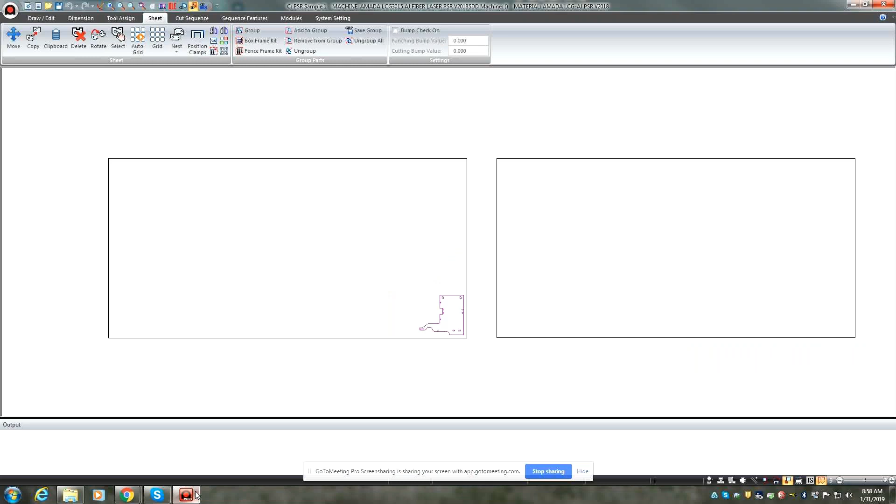Can you see my screen? Yeah, we can. We're on a projector so it's a little bit delayed, but we can watch my laptop screen also. Okay, well basically Zach wanted me to go over all the PSR stuff.

You guys currently aren't using AP100, is that correct? That's correct, we're Sigma Nest right now. Okay, so I guess because Zach said just make sure I show you guys the PSR stuff, which is what I'm going to show you. Anything else, all the other stuff, Mike Albert would take care of demoing for you.

Okay, so anyway, basically what I did is I took some of your parts and just put them on the sheet, nested them. Some of them common cut, some of them not.

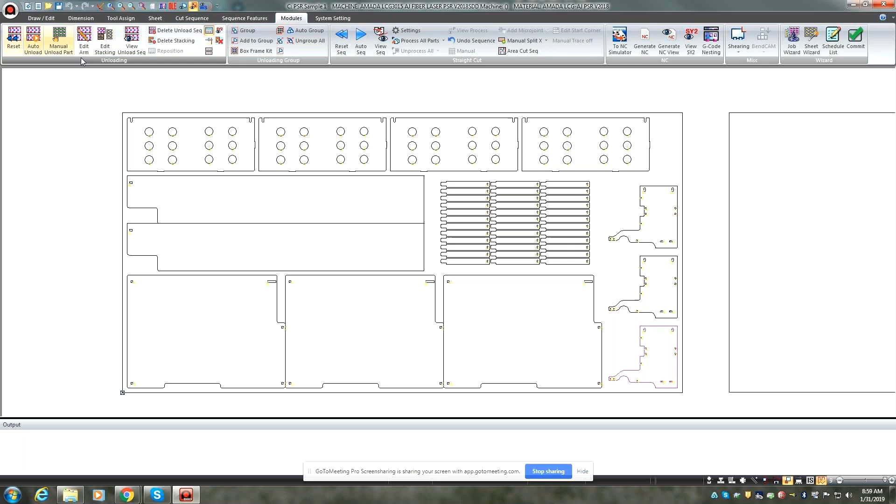Before I get started with the process, I'm just going to go over a few of the PSR stuff, which is located in our modules here. This menu here is all of our unloading PSR menu. Basically we have settings that are preset for you. This is all your cup location and whatnot, and pretty much you won't have to deal with this at all. It'll be all preset for you.

The only one that I would think you might want to check would be, for instance, we have a stacking module. If you want to just go ahead and drag parts from the sheet over to the drop table manually, you can turn this off and not use our editor. Editor is really nice though, and I'll show you that as well. So that would be a checkbox here.

Everything else, I mean, you definitely want to be able to rotate your arms, so you'd want the rotate, show arm dead zone, whatnot. And auto detect is automatically going to turn the cups on for you when it sees it inside of a good spot on the part. If it's inside of a hole, it'll automatically turn it off for you.

But basically the layout here, this switch here, this might be something you'd want to check. Right now it's set to sheet, and basically what that's going to do is take this entire sheet layout and drop it to the table the exact same way, same positions. Okay, so everything the way you see it on the sheet is the way you'll see it on the drop table after it's been unloaded.

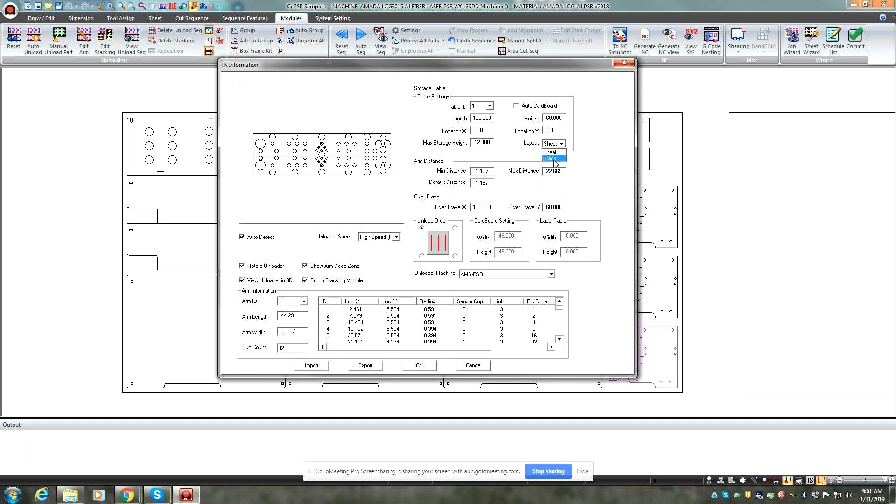We have a stack option here, and I'll show you the difference between the two. Basically that'll take all the like parts and stack them on top of each other. Okay.

So before we do anything here, there's a few parts here that I'm going to common cut. The thing is, with the PSR, you've got to remember the table's going to shuttle over to the pickup area where the robot's going to pick up the parts. So during that movement, there's going to be vibration, and corners could slide under the skeleton. So those are things we want to be aware of before we unload parts, and we have a lot of tools that will allow you to make sure that corners and stuff are freed up so that the PSR can pick up without any problems.

Thicker material, you don't have to be as concerned with it because obviously it's a lot more sturdy, and the moving around is going to be a lot less. It's just the vibration of the table moving that I'm talking about.

So what I'm going to do is, we have a feature here, and what we've tried to do in the PSRs is put all the features you're going to use here all in this one ribbon. So we have this straight common line cutting. So what I'm going to do is common line cut these two parts and these two parts, but I'm also going to use the same feature for these parts here. And the reason is because we have these little notches here that we have to deal with.

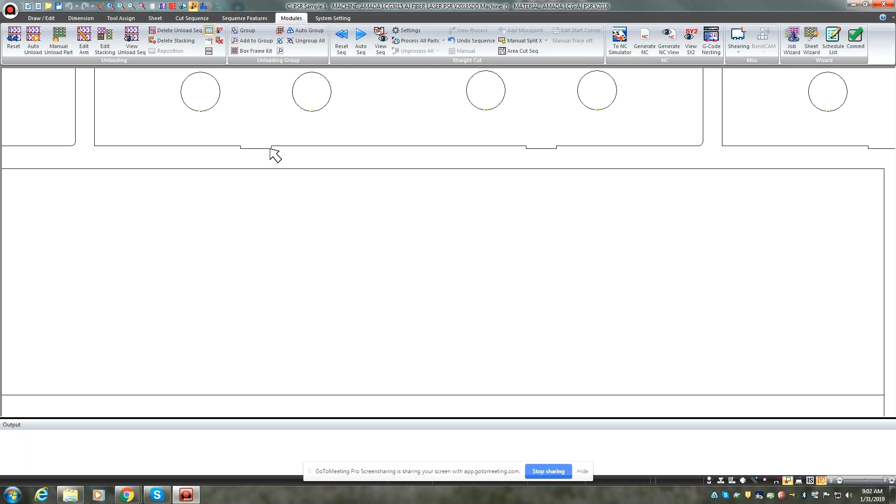This is very easily dealt with. I noticed that I think these were the 10 gauge parts, you gave 10 gauge and 12 gauge. I think these were the 10 gauge. So this is pretty thick, but still this is a very small notch and can easily cause you a little bit of problems with pickup. So I'm going to show you how we can free this whole area up and make it a little easier for the PSR to pick it up.

So what I'm going to do is come here to my settings first and just show you a few things.

We definitely want to use the straight edge cut. This is what you're going to use for the common line cutting for these particular layouts here. One thing I'm going to do here is check—there's a lot of features in here, and Mike Albert can go over these in detail with you if you need. But I'll show you what I'm using right now, which is this area here, the notch split.

Looking at this sheet on your actual crate table or bed that's being cut, your slats are going to be vertical here. So we can actually drop material in between those slats, and those slats are around maybe 1.5 inches apart—let's just say they are. You'd actually have to go down and measure to be exact.

So what I'm going to do is check my X box here, and I'm going to put in less than an inch and a half because I want stuff to drop in between. So I'm going to put in, say, 1.25 inches—that would be a good value to use.

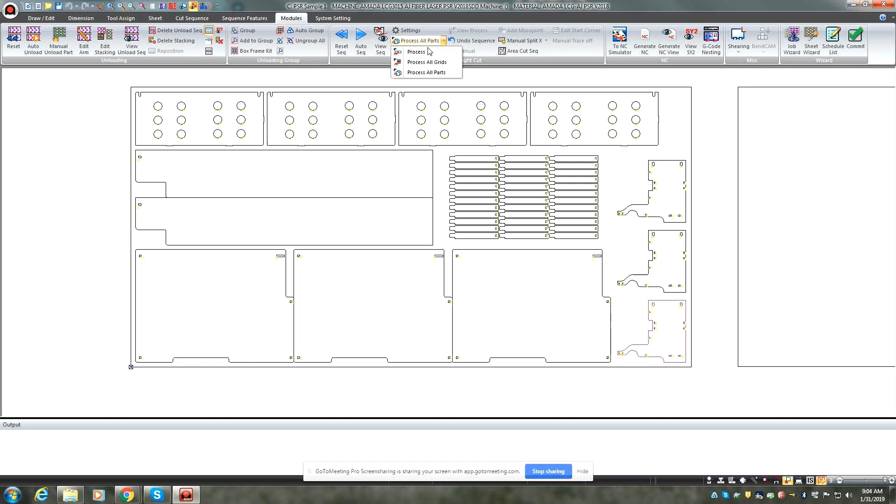Now with that, I'm going to go ahead and set these up to common line cut. The way to do that is—I don't want to process everything because I'm not common line cutting these, or these either. So I'm just going to come here to go to process. All you do is click the parts that you want to common line cut. So this one, and this one.

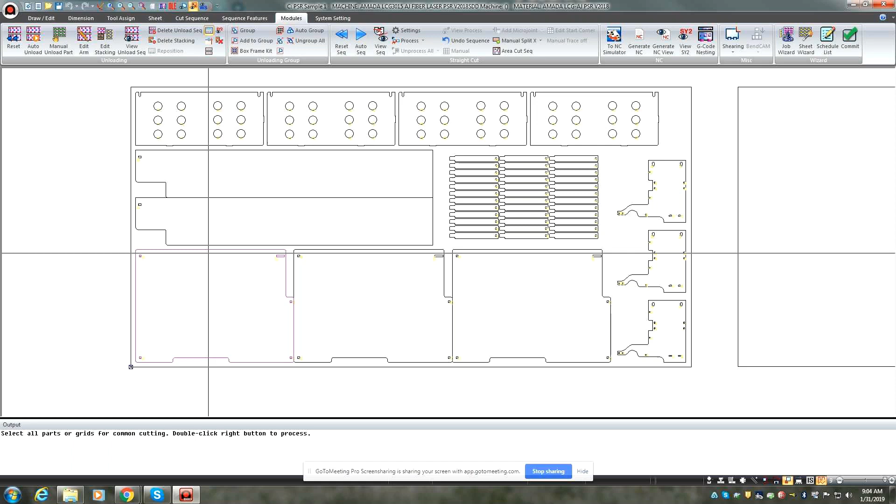Notice the message down here—well, I aborted—but the message at the bottom says double click the right button to process. So if I double click the right button, that's because I aborted. Let me do it again.

What it does is process the common line cut. Now notice what it does if I view the process—basically it shows you what it does. This is the common line cutting. The blue line is the common line cutting. The actual black line that you still see, that's going to also be cut as well.

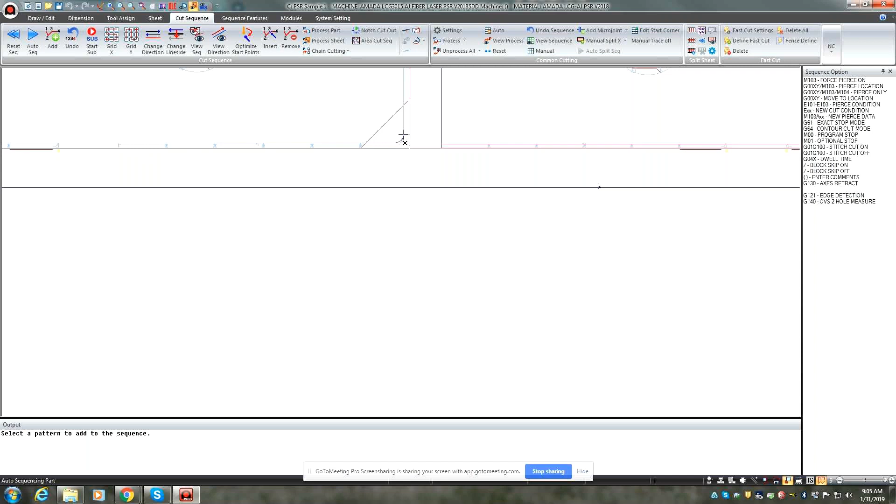But you'll notice when we cut, we're going to have that 1 1/4 inch or 1.25 inch split. So if you notice when I go to sequence all of these parts, notice all these little sequence lines you have here—this is going to drop these little slugs down. So what's going to appear when this is taken over to the PSR is none of this material is going to be there—it'll be pretty much just a straight rectangle.

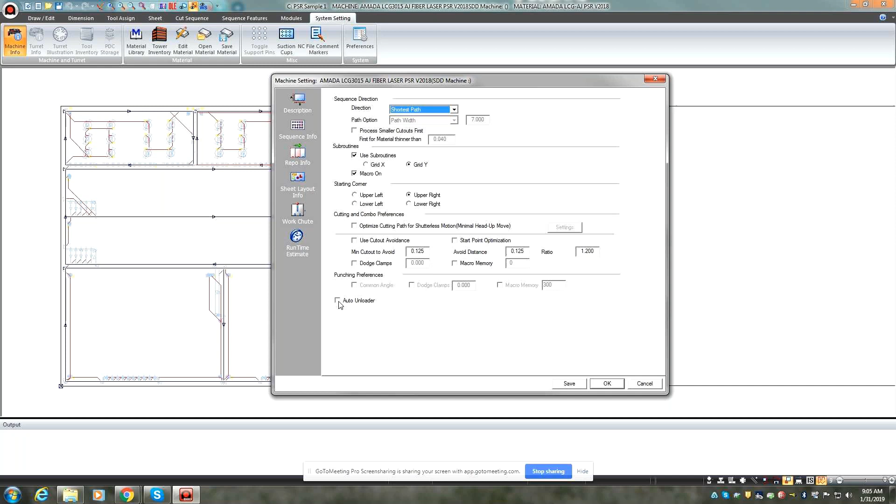PSR should be able to come in and pick these parts up. So when using the PSR, we can set up our machine info over here. We have an option in the sequence info to let it do this automatically for us. This isn't a bad idea—let it go ahead and do its thing. It's easier to edit and change what it's already done.

I should say it's not easier—it's just the same, just less time to let it do it. Then you can go back in and see, hey, maybe I'll do it this way. That's what we're going to do. So if I come over here to cut sequence, I'm going to reset it. This time I'll auto sequence with the auto unload on.

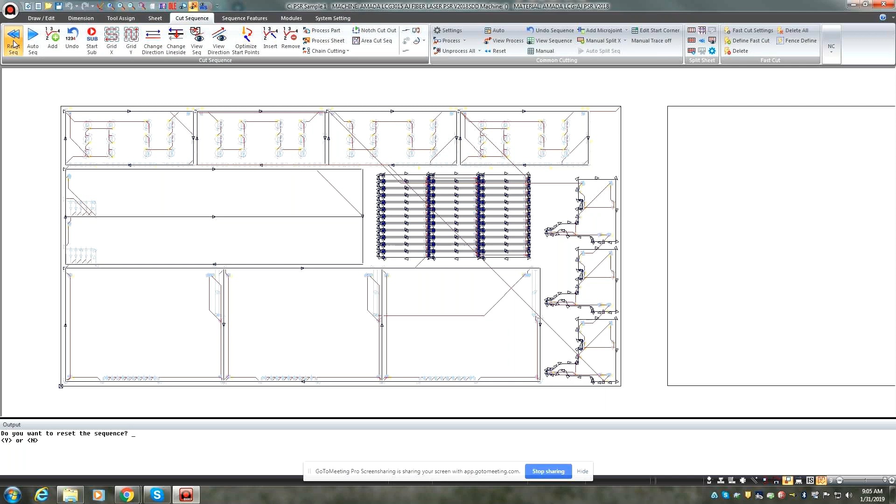What it's going to do is unload everything. Notice I had my settings set to sheet, so basically what you see here is what you're going to see on the drop table. It's also fast—maybe not as fast on yours, maybe you'll see it a little better. But we have this option down here that you can slow it down. That'd probably be way too slow.

I think that's going to be way too slow to watch the cutting—I don't want to take that much time. Let's speed it up a little bit. That's at 8... yeah, see, 9. I'll speed it up. There we go, that kind of slows it down.

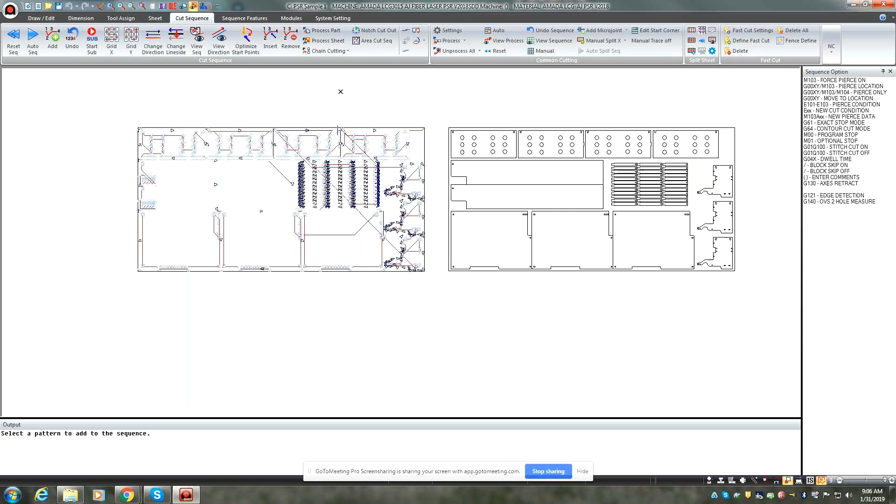But anyway, you can see as it's going, it does all the parts that way and does it the same as a sheet. So if we come over to the modules and go back over here, we'll set it up to stack and say okay. Now if I reset the sequence and say auto.

Oops, sorry, my bad. I need to reset the stack, so let's just delete the stack.

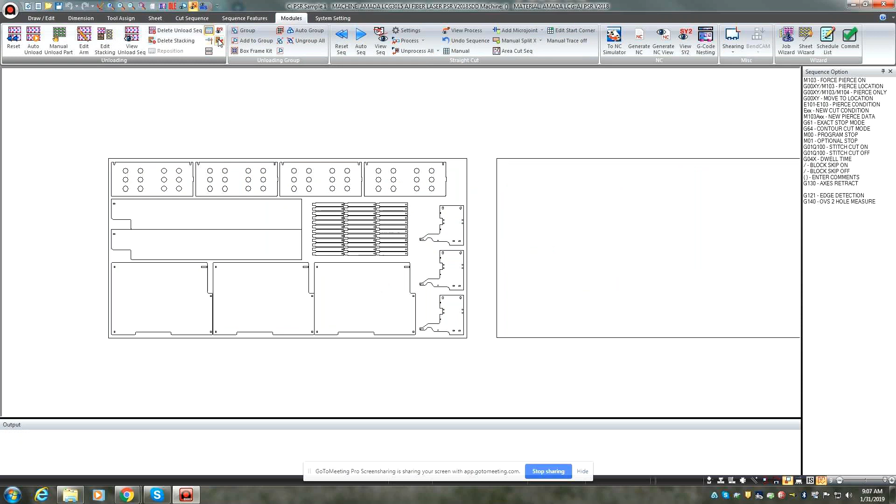Now if we go auto, it'll stack them. The thing is with the stack though, is it stacks them according to wherever the first part is, so it's kind of still like the sheet. This is not good, especially if you have a pallet here and you're trying to stack them all on the pallet. This part over here is obviously not going to hit the pallet.

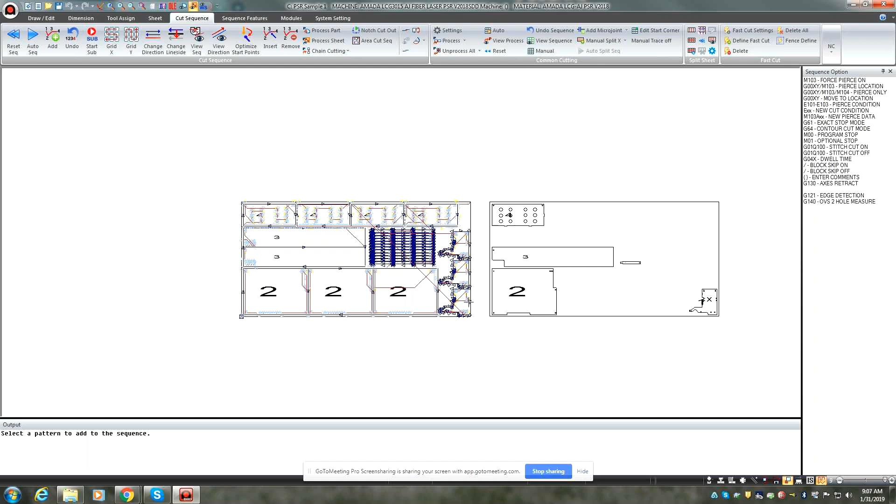So what we could do, and this is what I was talking about, is turn that switch on and off from our editor. I'm going to turn off the editor right now, go to edit stack module, uncheck that, and say okay. That allows me, when I go to edit stacking, to come over and say I want these parts over here, and maybe this part over here. So it allows you to manually manipulate how you want that stack table to look with the parts.

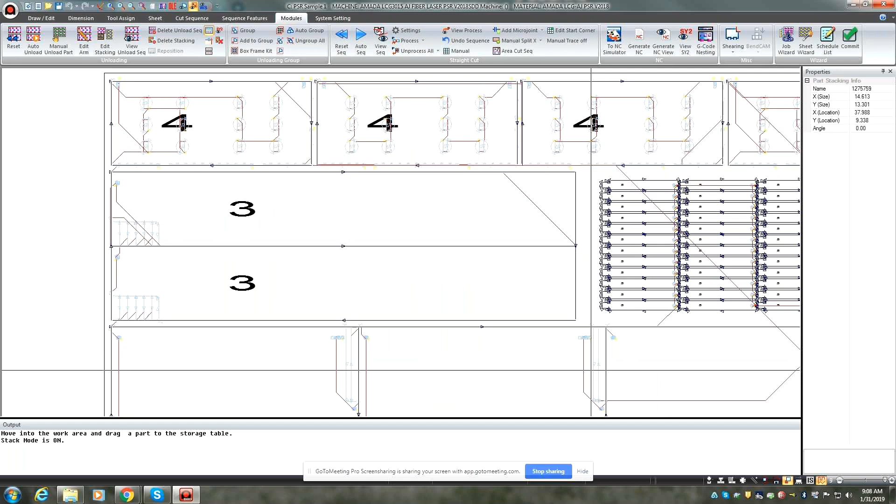Okay, so basically I don't know what happened because it went so fast and I didn't really see. All I know is that my cutting's good. I've got all the slugs that I want taken out, this is all taken out. So basically my parts should be good, now these are the ones I'm concerned about because they're really small.

And I'm going to show you a feature, and I purposely did this to show you a feature. We have what we call a box frame kit. What I could do is tab these into the actual material, box them in, and cut out the box and pick up all of those parts at one time. I'll show you how we do that.

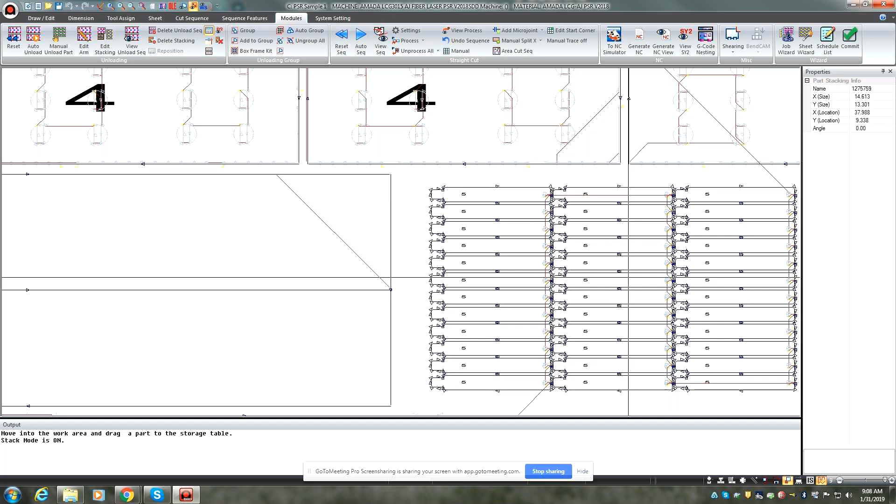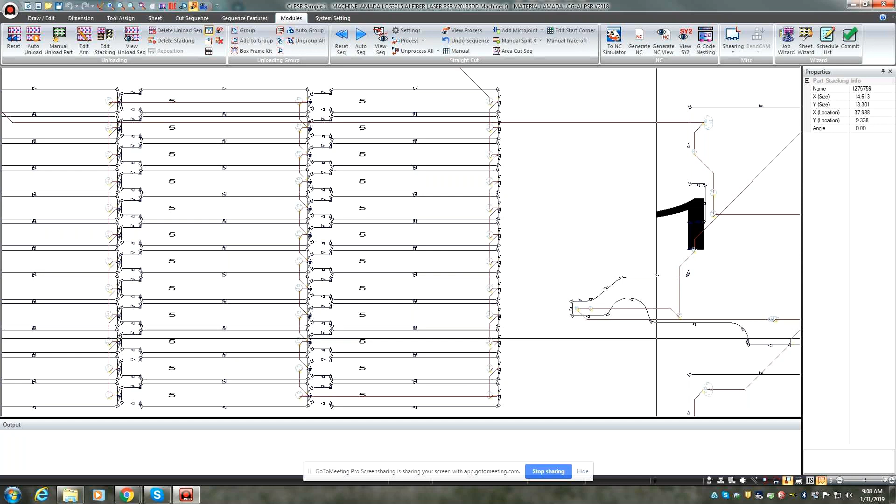This part here has got a lot of cutouts. I purposely wanted to show you this because, thick or thin, it may cause you problems. Thicker, not as much, but thin, you probably would have a hard time. It probably would hang up on the frame or the skeleton, and it might cause you problems. So I'm going to show you the features we have to kind of clear this up and free it up a little bit, make it easier for the PSR to pick that up.

So first, let's check this top part and see what the software did with it. We come over here - I'm going to go back because I'm going to show you the stack module next, let's turn that back on. But let's come over here and edit our arm and see what it did on this particular part. This particular part looks pretty good.

The suction cups that you have here that look like a bullseye, those are sensor cups. One of those cups has to be on the part in order for it to pick up the parts. If it doesn't sense material underneath, it's not going to turn on suction for any of them. So what it will do with that auto detect I had, notice these cups turning on and off if they go over a hole, and then if I come off the hole, it goes back on.

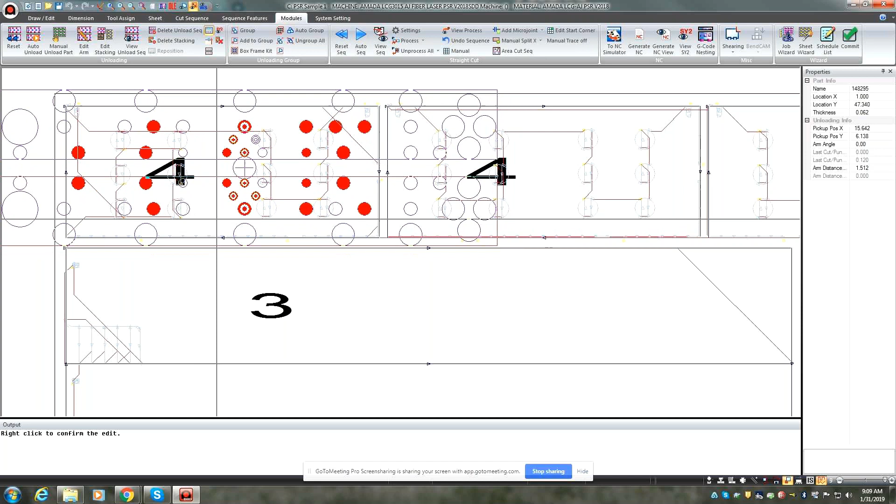You can position this however you feel it's going to be strong enough to pick up the part. And I will say the suction on these cups is pretty strong. In fact, just yesterday I was out there, we have a machine here, and I put my hand underneath the cup - one of the techs was showing me, and it sucked my hand right up.

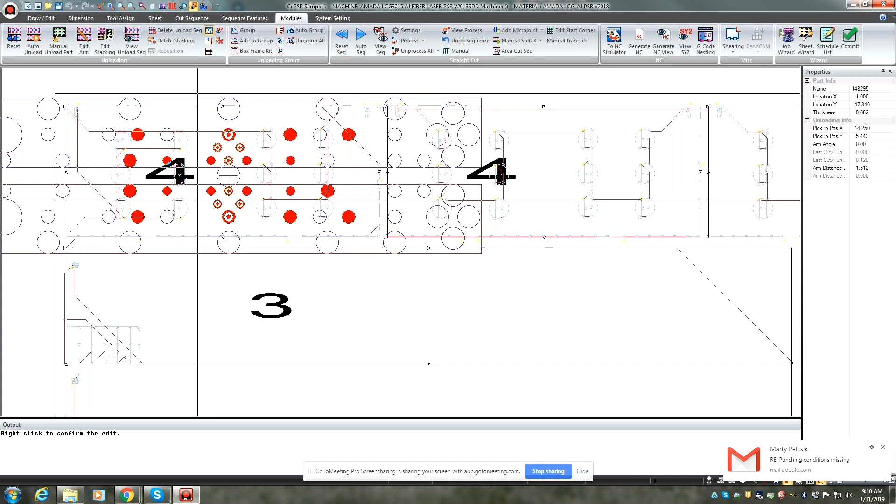They're pretty strong. So the way to position those, as you can see, I'm just holding my left button down, you just put it wherever you want to put the bottom arm. And then what you can always do is stretch the top arm. So there's a minimum - let me zoom out a little bit - there's a minimum and a maximum, and once you hit it, the arms will stop.

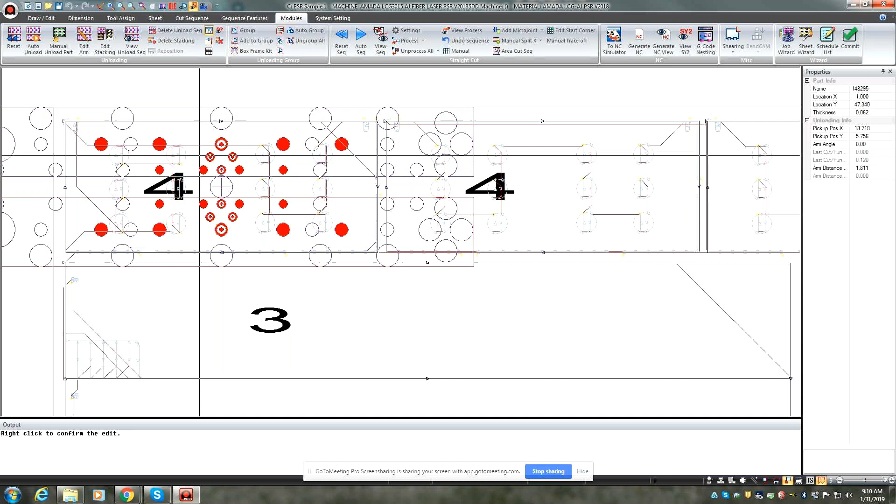So obviously you can't go any further than that's as high as I can go with that. So you can do pretty big parts, and I'm going to show you on this one down here. But anyways, once you get the arms where you want, you would just right-click the mouse, and that locks that in. Now, because all these parts are the same, it's going to be the same on all the parts. Okay, so this part's good, arms are good. I'm going to go into the editor to show you the stacking, so we'll ignore where that is for now.

So let's go to the next one here. Now, this particular one - okay, that's picking, and that's good. That's a good pickup. But I feel that these arms are strong enough for me to pick this part up, and then this arm to pick this part up without any problems.

Every single cup will be turned on. If I center it properly, I don't think I'll have any problems picking up one arm with one part. So I could pick up both those parts at the same time.

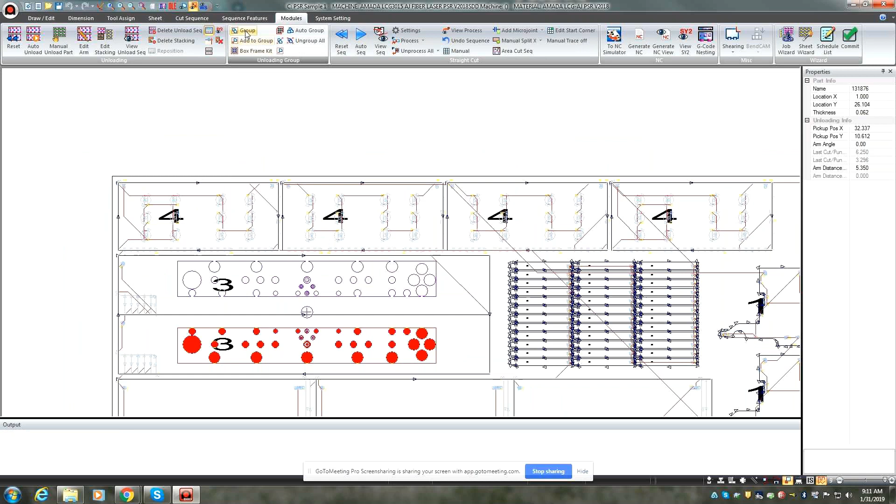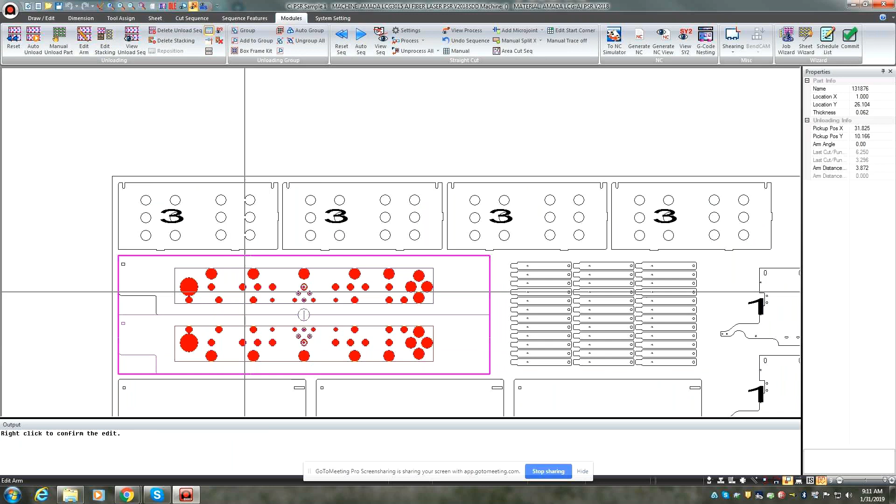So what you do for that is we have a feature called grouping. All I'm going to do is select the group option, and you just draw a box around the parts you want to group. The software will tell you the number of parts in the group is 2. Say OK. Now when I come to edit my arm, even though it's 2 parts, it's going to see it as one pickup. Notice my arm and this second part automatically turn on.

So what I'm going to do is position this so that it's centered to both arms. Close enough, I think. And then right click. Now these 2 parts are taken care of.

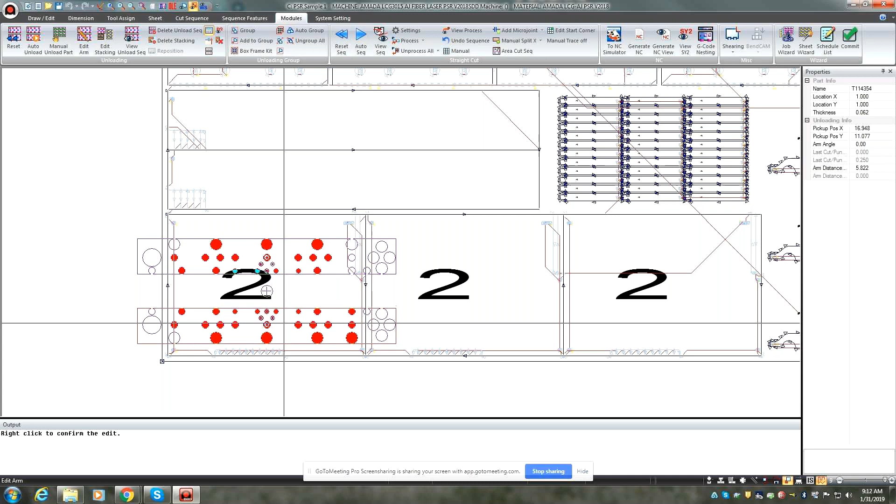Okay, so we'll come down here to this part. Same thing - now because this is a PSR and it's robotic, it does rotate. So if this is a good position, maybe you'd want to open it up a little more, maybe rotate this to 90 degrees. Maybe you'd get a better pickup that way. Whatever you feel is going to work, that's what you would do. If you want to put it back to 0, we can come over to the right and just hit the arm and put in whatever value.

There will definitely be times you have to pick up at 90. These particular parts, if they were at 90 degrees, your arms would have to be at 90 to get a nice strong pickup. So we could go ahead and do that. This part doesn't need it, but just so I can show you how it works, we'll pick this part up at 90. So I'll right click that.

Is it either 0 or 90, or could you do like 45? You can do 45 - whatever angle you can rotate. It's manually rotated, a free rotation. So let me see if I can grab it here. There we go.

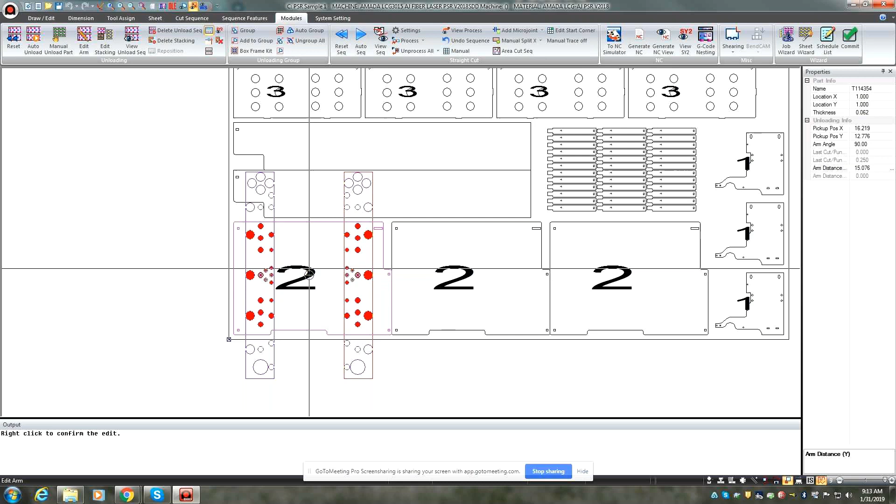Oh I see, yeah. No, you can rotate if you want - that's the pickup you want, that's the pickup you're gonna do. So especially when you're nesting, true shape nesting, you're not gonna have everything at 0 or 90 - there's gonna be parts at crazy angles. So you just follow it, and if you can't get the exact angle you want, that's what this is all about. Let's say I wanted an exact 60 degrees - I can type in 60 and it'll rotate those directly to 60.

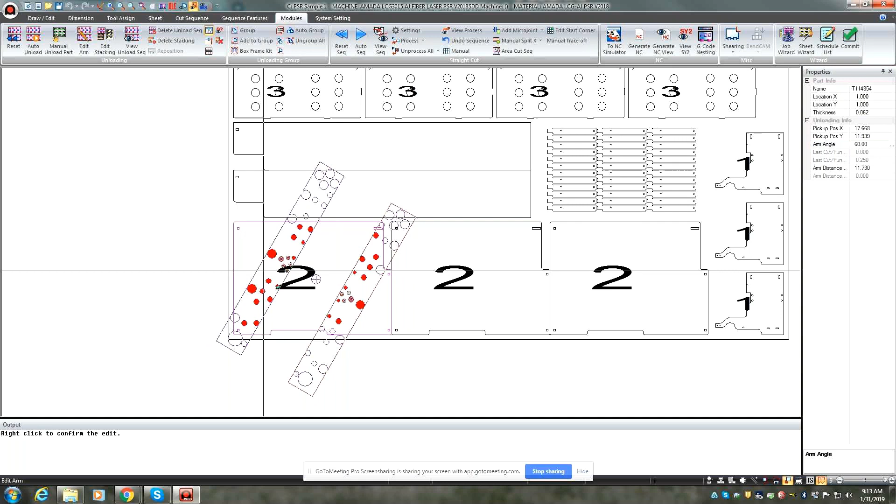Okay, same thing then - you just get your primary arm, which would be this one. This is your stationary arm, which both arms will move relative to. So always position your stationary arm first - they call them arms A and B. This is arm A, this is arm B. Always position arm A first, which is sometimes hard to tell, especially if you've been rotating for a while. But it's the one where both arms move. Position that one first, and then you can close or open the gap with the second arm.

And obviously you want as many cups as you can get on the part as possible. Just for kicks, we'll go ahead and do this - we'll keep it like that. Not the best way to do this part, but for a demo, hey, it'll show you what it can do. So we'll keep it at that. Notice it's the same on all of these parts here. Okay, so we've got these three parts taken care of.

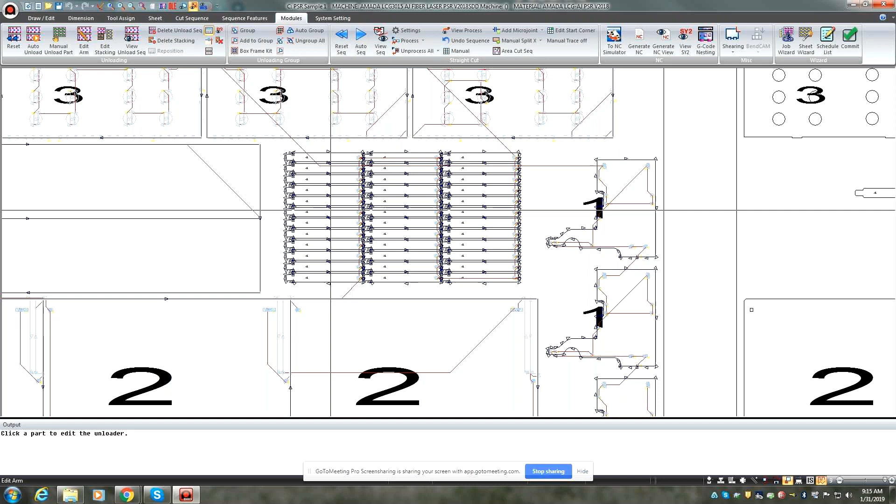Now this particular part, I'm going to box kit it. That's different than grouping - grouping assumes the parts are free and I'm just picking up more than one. Box frame kit assumes the parts are tabbed into a kit or tabbed into a frame, and you're picking up the frame. So the first thing I need to do on this part is select the F7 key and pick this part.

Then I'm going to go to F5, which takes me to the part view. The first thing you need to do is put a micro joint on this part. So basically I'm going to put a micro joint here - it's 20 thou, that's good. Maybe we'll make it 25 just to be safe, maybe even 30 to be even safer. And then put another micro joint here.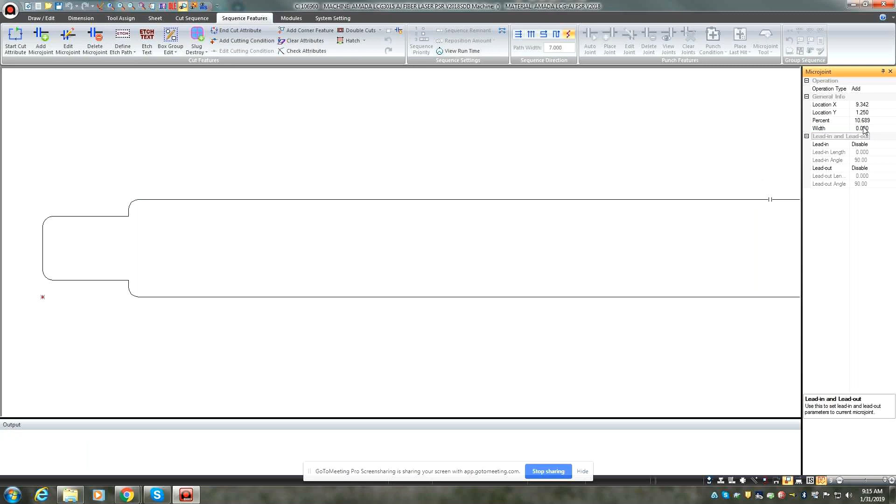You could put them wherever you want, as many as you want. All we're trying to do is make sure that this part stays in the frame. Now notice I put that micro joint on the part, and it'll put it on all the parts, because basically it's just a copy of each of the same part.

So now what I want to do is go ahead and go to box frame or fence frame. The difference is fencing allows you to maneuver in and out of areas. If I had a true nest, I could draw my box around these, draw my frame, and it doesn't have to be a true square. Box frame is all I need for this one.

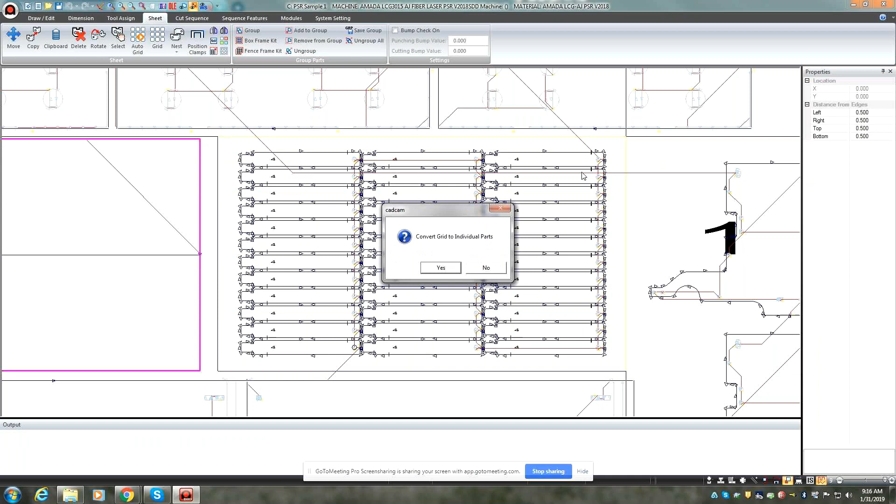So I'm just going to come in here and draw the box. It converts the parts to individual parts. So what it's doing now is converting all the parts into individual parts and putting them into the frame. So I got 36 parts into the frame.

Okay, so now you see the pink line here? The red line is basically those parts grouped - that's my group line. The pink line is going to be my cut line, meaning that's going to cut along that pink line, and that's what I'm going to pick up with all those parts inside of it. Notice over here I have a half inch frame.

That half inch is the border between the part edge and the actual frame. I've got plenty of room here, and plenty of room here. I'm going to go ahead and increase that frame so that I could possibly put some cups on solid material.

I'm going to have cups, and they're not going to turn on because it's going to see that they're inside of cutouts on the edges of these parts. But the thing is, let's say your beam diameter is 8 thousandths, and you're on a grid table - it's going to suck through that material, but there's nothing underneath it that's going to hang it from picking that up. You're going to lose probably a little suction maybe, but it'll still pick it up.

So you'll see what I'm talking about when I put these cups on. But I'm going to increase this frame. Let's say the left frame, I can probably go a good 2.5 inches. That's good. And the right frame, I can probably do the same, say 2.5.

And the bottom, maybe the top frame, let's see, maybe 1.5 inches, and then the bottom 1.5 inches, let's say. Okay, so that's good. Now what I'm going to do is come over here to my edit arm, and just click inside of the frame.

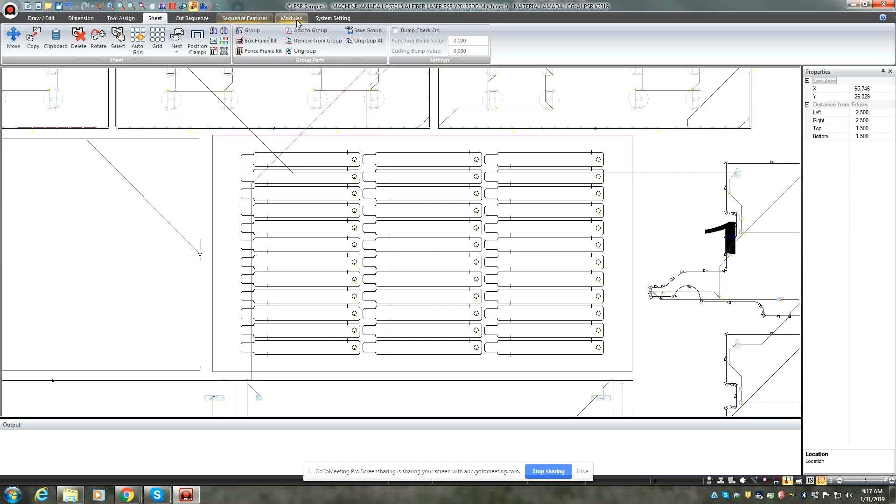And now notice it'll turn on what it can. See, it sees these are good, those are in material, but these other ones are either on the edges of the parts or not. But knowing what I'm doing, I'm basically cutting those parts, and they're in that frame.

I'm not inside of a hole - basically there's just an 8 thousandths line going through there, so it's not solid material. It's not going to hurt to turn these cups on. So you can turn as many cups on as you want, as you feel it'll pick it up. That's why I put this extra material here, to make sure I do have some solid cups being turned on.

So probably with just that and these sensor cups, I'd probably be okay. But you can go up or down, try to get this to- whoops, I didn't want to rotate it. Let me go back here to zero. Sometimes if you get too close to this little center here, it wants to rotate. But let's see if I can turn it so that's good.

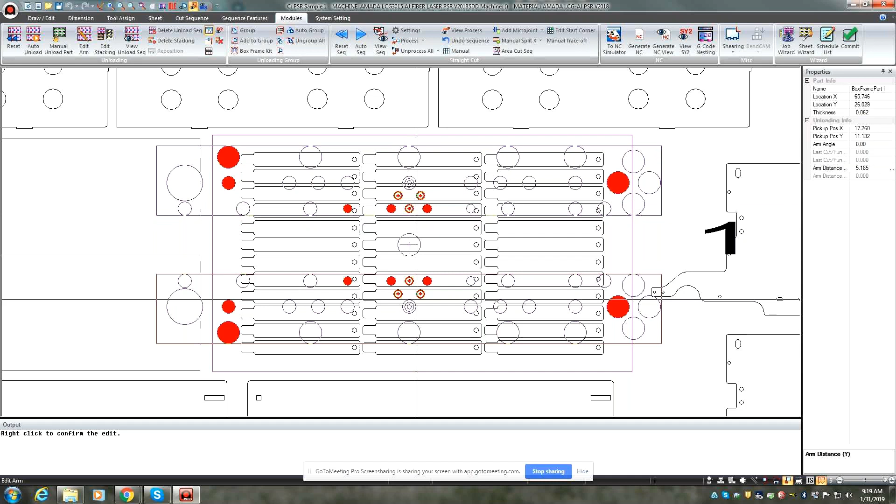I have a bunch there, but I'm more concerned with these bullseye ones sensing material. Now see, this one's inside of a hole, but not much. It's going to be your discretion whether you feel this is enough, or you want to just say it's only laser cut lines - it's not going to hurt anything, and you can turn all the ones on that you feel are necessary to pick up this part.

So we'll just go ahead and- if you real quick, if you turn one on, does it have like a sensor in there that all of a sudden it feels like it's not getting the correct suction? Will it not pick up?

No, I think that's a question that probably the guy - his name is Thomas - who would install at your facility would be able to answer.

Those would be more that he would be able to answer. To be honest with you, I don't know. All I know is that it...

As long as nothing's underneath and obstructing the suction, it'll suck. It's going to lose suction, obviously, because it's sucking air. It's not going to be a tight grip like these are. There's no fail-safe in there that senses it's not sealed. That's what these are. These have to be fully, at least one of these has to be fully on the material. So if none of these were inside, if air was getting into any of these...

Bullseye ones, if air was getting into them, it probably would air out and not pick up the part. But because one of these is fully on a part and there's no air getting through, no gap there, that would be fine. All these other ones will just turn on the suction and use whatever the pressure is. It's just going to lose a little bit because there's air under there.

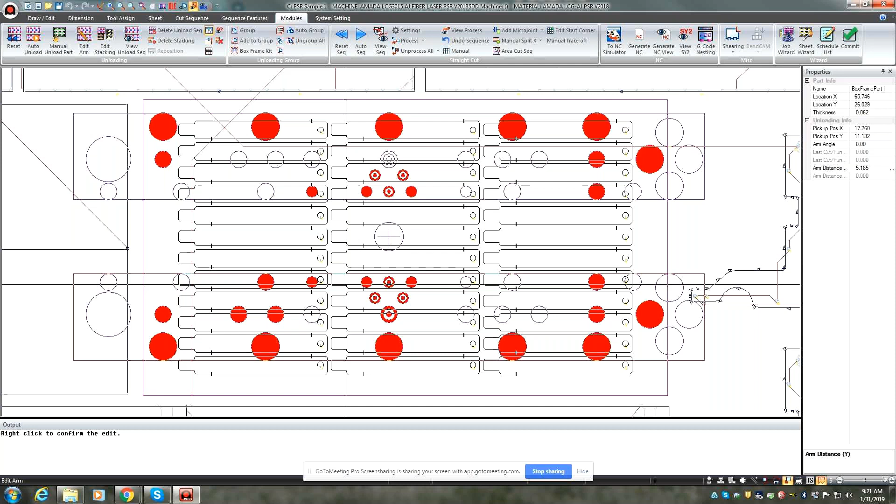I believe it stops the process. I believe it stops the process. That again would be something Thomas can answer, but I believe it stops the process. I'm not 100% sure on that. I don't think it's going to go to the next part until it knows. You could probably bypass it, but if you're running lights out, obviously there's nobody there to say 'hey, continue on.' But I believe it would stop. Not 100% sure on that.

So once you get it the way you want, right click, and now this part's taken care of. So now this particular part, we definitely have some concerns with because of the shape and the contour, and there's just a lot of areas it could hang up.

So first, let's see where our cups are at. Anytime you have parts like this that we're going to try to free up, your best bet is— even though I could probably swing these arms at 90 degrees and possibly pick up all 3 of these—that's not a good idea when you're dealing with parts that could hang. Those you definitely want to keep as a single part.

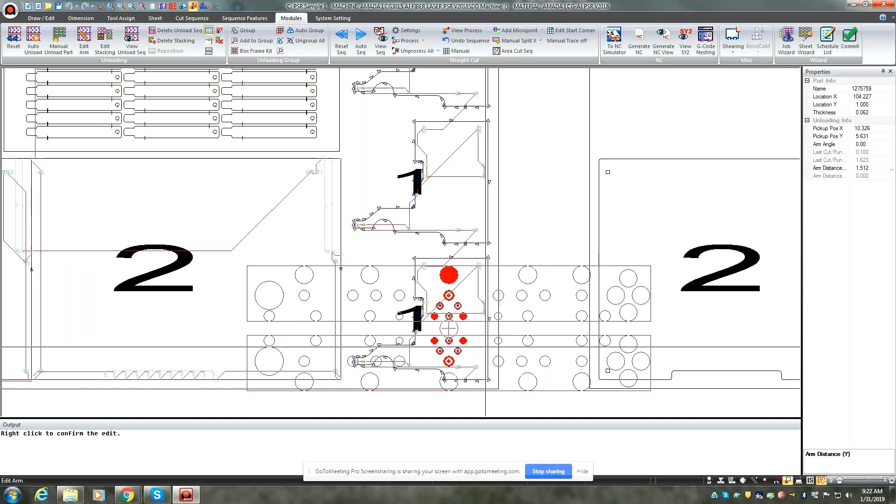So let's see, well, definitely this would be a good one. Let's get our arms at least in the right spot. So I think that would be a good pickup there, all of those cups being in a good spot. We even have a cup over here that'll help out on that side. So my cups are now set, but I've got a lot of contouring here that I'm concerned with.

So what I'm going to do is take the part into my part view, and we have what we call notch relief. We have rectangle, and this is where the fence comes in as well. So what I could do is put this little box all the way around, and the software will cut this and free this whole area up. Well, that's quite a bit of cutting, and obviously this takes a lot of machine time to do that.

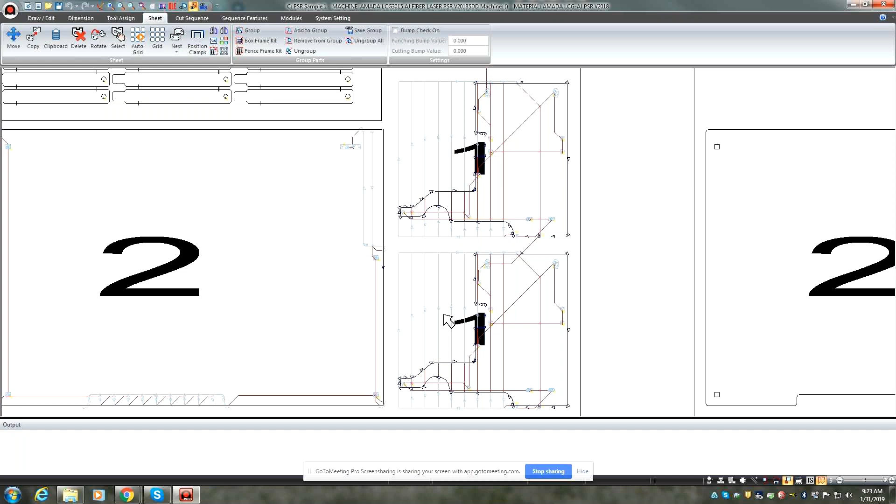The red lines, by the way, are the trace lines—it's not cutting those. It's only cutting the grayish blue lines. But that's a lot of cutting, and I think it's unnecessary to do that. So that's the box option—I just wanted to show you that. That's one way you can do it.

Another way is with the fence. So let me delete this one and go to the fence. The fence allows me to draw my fence, or my relief, and keep it close to the part.

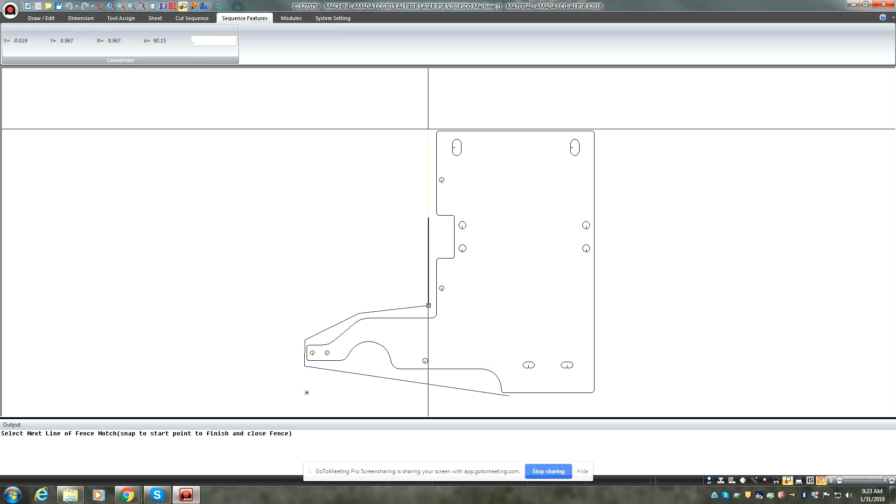Is this so—if we had a part like this, does our programmer have to do this on every single one, or can we save this as a setting? Oh no, so you—you can.

Yes, you can save this with the part. Everything I'm doing here in the part view, I can come over here and go to File, Save As, and save that part. So the next time that part's put on another sheet, all this stuff's already done.

Okay, yeah, because one of the things I'm noticing is it seems pretty programmer intensive. So if we can just kind of set it and forget it, that would be great—we have a dedicated programmer, but we don't want him to have to set this every single time.

Yeah, you can set up—I can set up, okay, well let me show you this one here. So that's what the cuts are—different, smaller. But again, that's kind of an overkill as well. Let me show you that in a second here. I'll answer your question in a second. Yeah, all right, but I would do something like this.

Because really all you need to free up is the indented areas. And if you feel comfortable, you can kind of free that up as well there. If you even want to free up this, you can do.

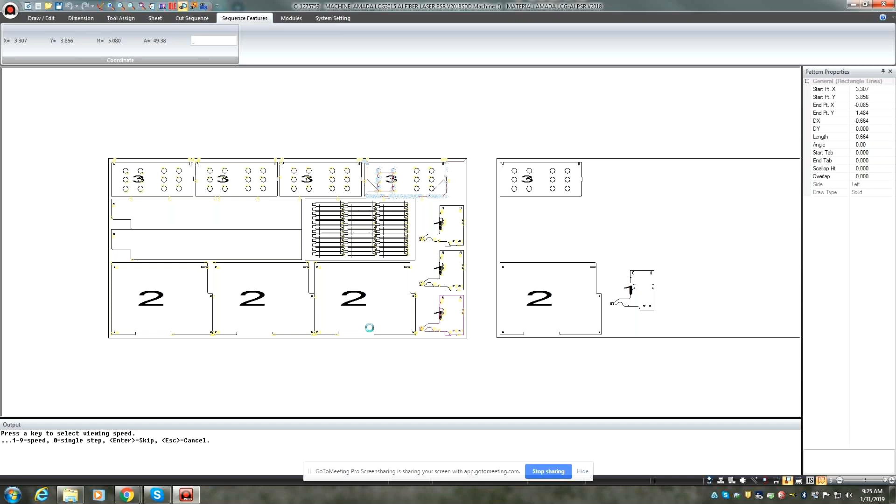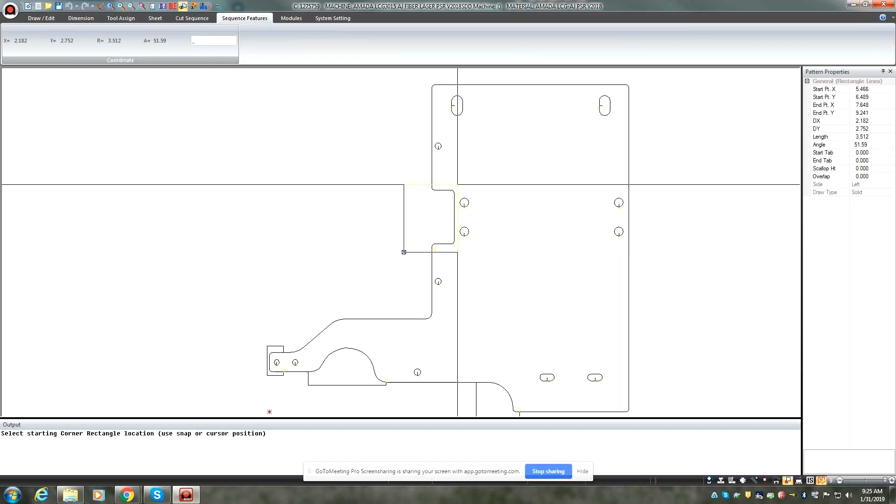That's what I'm going to do for this particular one. Okay, I didn't have enough there, so let's delete this one. I didn't give it enough material on this. I only have an 8, so let's just make it a little bit bigger... it's too big. Okay, there we go. So that cuts that.

But coming back over to here, basically my sheet is now ready to process and to run. But to answer your question, we have a lot of automatic tools. I could set up this whole sheet to not worry about it and basically destroy.

And especially if you're doing lights out, we have this sheet destruction tab in here, corner sheet splits that'll split the corners. We also have the sheet split cuts that'll just basically cut and destroy the sheet around all the parts and let basically all the material be cut, and that does it automatically.

I'm just kind of manipulating and showing you what you can and can't do. The software is going to, like I showed you, do the auto and it's going to do what it feels is best. Well, it felt it was best picking up every one of these parts. To me, that's fine. If that's what you want, it'll do that.

But in that case, it's a lot more time to unload 36 parts one at a time versus saying, okay, let me just microjoint them and unload the whole group of them in one shot. So those are the kind of things that auto will not do for you. And picking up these two parts, it'll never group parts for you automatically unless you do it yourself and save it. Then the next time you do it, it'll already be grouped.

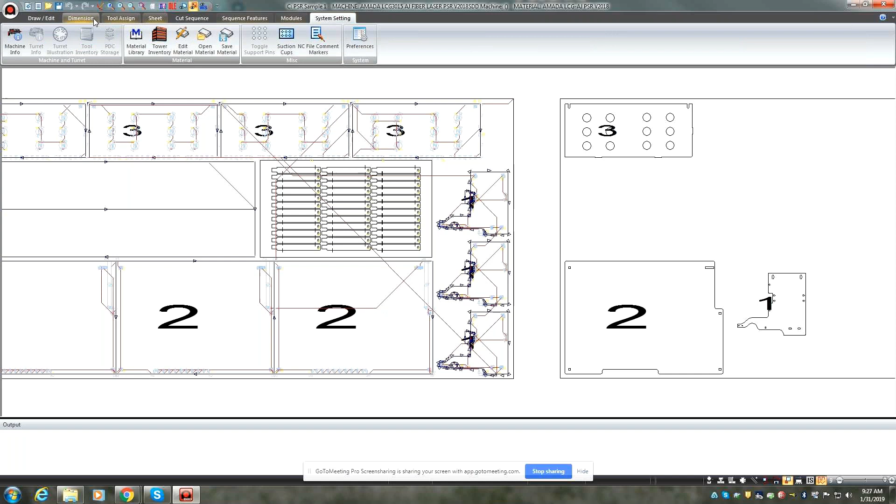So the auto can determine the best suction pattern on... yeah, well, that's what it did before. That's what it did. When I first hit auto sequence, and when I turned that switch on in my material or my machine info, that's what it did. It did its thing. So notice when I come over here to modules, I'm editing what the software already did. It tries to find its best location. You could literally hit auto and take it to the machine and run it.

Okay, but cool. What I'm doing here is making sure - on thicker material, you're probably okay doing that. But on thinner material, these are the things that could cause hangups. And if you're running lights out, you want to make sure you have no hangups. Although if it hangs up, that's it - machine stops.

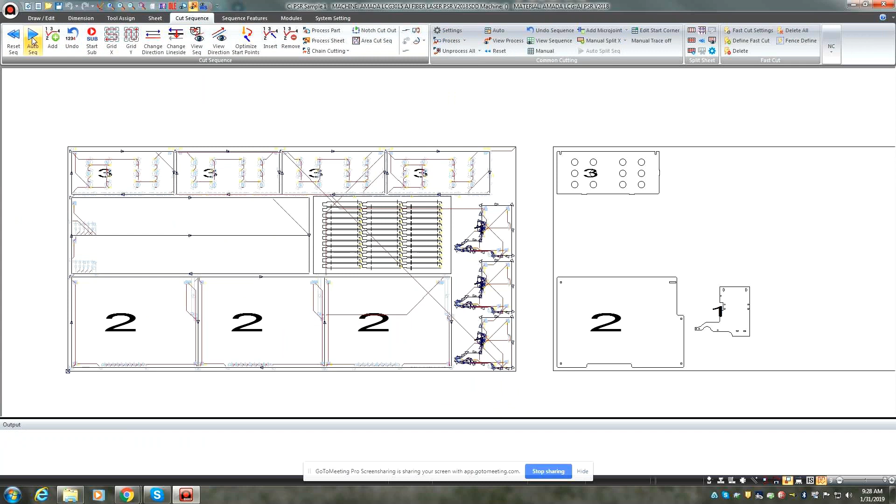Okay, once we get everything, you can save those edits, and then next time you run auto, it'll know that those edits are supposed to be there. So, I did all those edits, I did all those changes. So now when I hit auto, everything's done. You notice those arms even swung over at 45 degrees.

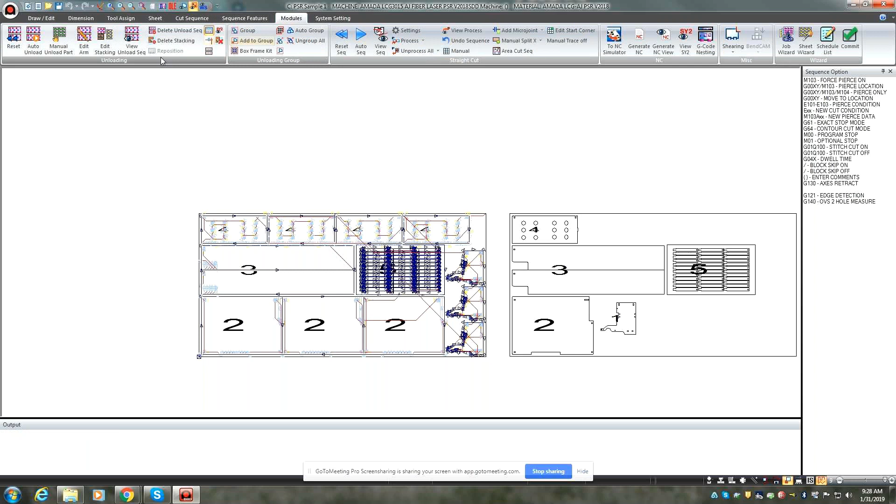Okay, so here's my new stack, my new layout, but I may not want that. So I'm just going to come in here and show you real quickly the stack editor. It's an entirely separate module, part of this package. It has pallets or it doesn't have pallets. I actually made these - you can make them yourself.

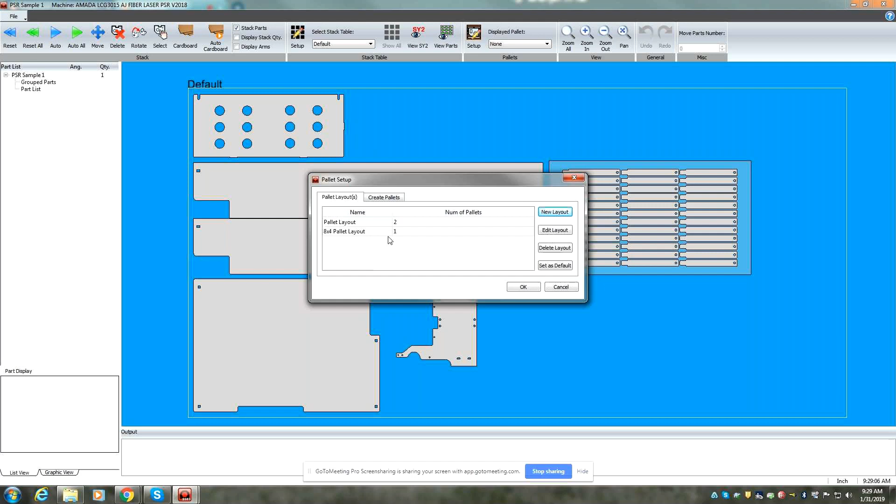We have a pallet setup here. You can use metal, or this is obviously wood. There's also plastic, and it's just a display - that's all it is. I made these pallets myself, just to kind of show you how it works.

So once you set up - for instance, I have what I set up as no pallet. In other words, I'm just going to put a sheet of material on top of this table, and I can drop parts anywhere I want. Or if you do put pallets on, you can structure the pallets - here's a 2-pallet layout, here's an 8x4 pallet layout. So whatever you're going to do, that's how you set this up. Now, as far as the positioning, same thing.

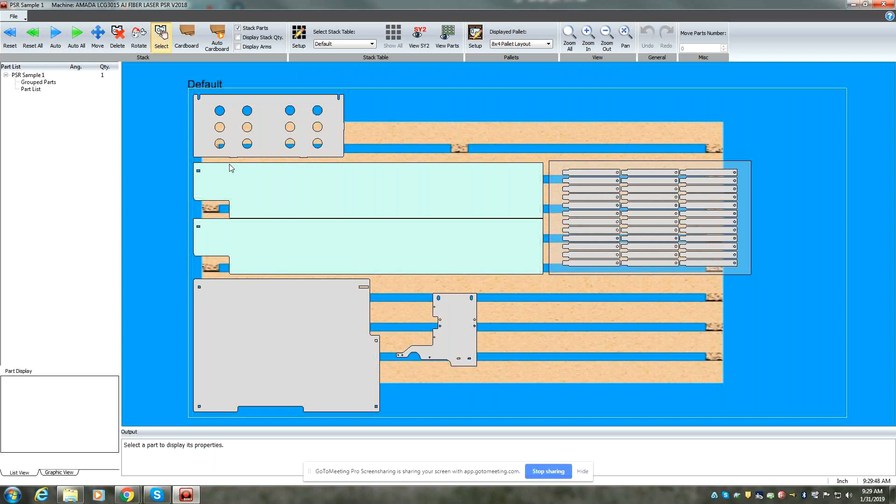This is an entire manual type or auto nesting package right here, specifically for the drop table layout. So what I could do if I want to move any of these, I could just come over here and move it. It's kind of hanging off the pallet.

So what I could do is just reset, and what it does is it brings all the parts over here. Now notice the group - these parts are all in a group, so I'm moving them as a group. I'm not going to move them individually. I can't move them individually. They're already grouped, so it sees it as a group.

And then here's all the part data. Your list view can be done by part name, or it can be done by the shape, so you can actually see which part it is.

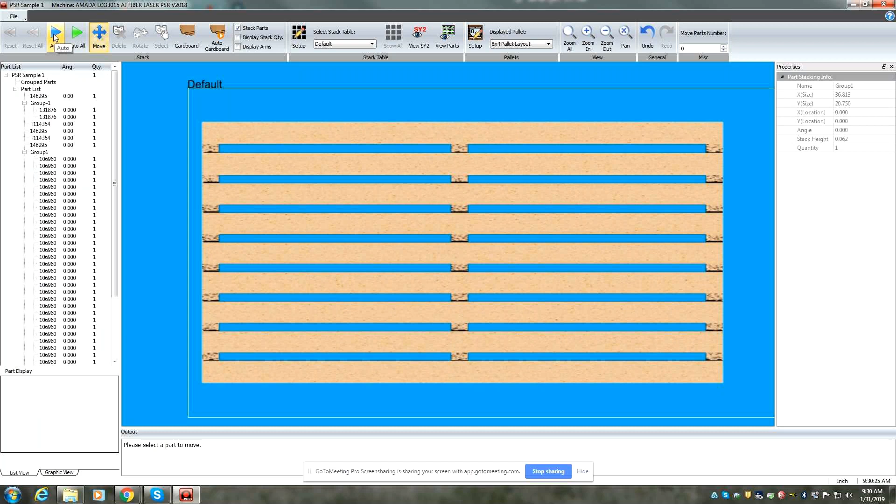We have this auto button here, so we can auto nest or auto drop our parts. And again, it's using the stacking, or you can do it without the stacking. On an 8-foot pallet with all these parts individually, it's probably not going to have enough room for them all, so you definitely want to probably stack. But this is your manipulation.

We can put cardboard in between each part. So if you have stainless parts that can't be scratched, we have a feature that puts cardboard in between each part, and the PSR will actually place the cardboard and unload. There'll be a stack of cardboard, and where it unloads the part, then it goes and gets a piece of cardboard, puts it on top of the part, and then it goes back and gets the next part.

So it stacks cardboard in between parts. It's just a full area that you can basically adjust and set up how you want your drop.

The nice thing about using this versus the manual one I showed you in the sheet layout is that if you're going to run multiple sheets and stack on the same pallet before you actually unload the pallet off of the unload table, we have an option to load another sheet, another SY2 or a sheet file into this editor, and I can drop those parts on the same pallet. So you can actually see these parts, plus you're putting parts from another sheet on here, and it'll save that as well.

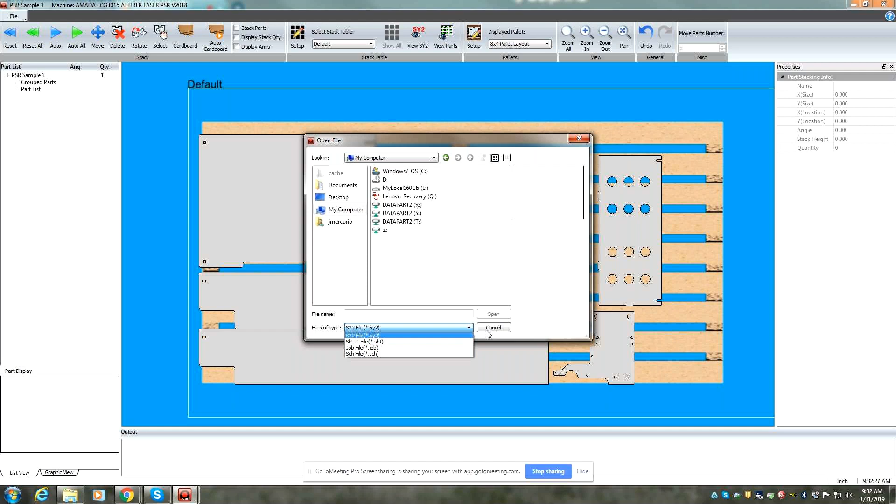We have a nesting sheet wizard, which automatically will nest the parts for you. You can load them as a job, you can load them as a schedule, you can load them as a sheet - whatever your process is. Yes, that's how you would load it into here.

So once it's the way you want it, you would go ahead and just exit out of here and close it. You've got to say yes to save your changes. And so now you notice here, we don't show the pallet on this one, but the parts are the exact same as they were on the pallet. So basically, once you have it set up, you're ready to go - you generate your program, ready to go.

We have a nice little feature here. All it is, is just a viewing feature. It does, and it's kind of cool, but it'll show you the process of how the PSR is going to pick up your parts.

So what we could do here is - what's that? Oh, it's unloading to an over-under table, which I kind of like the idea of. Let me hide that. There we go.

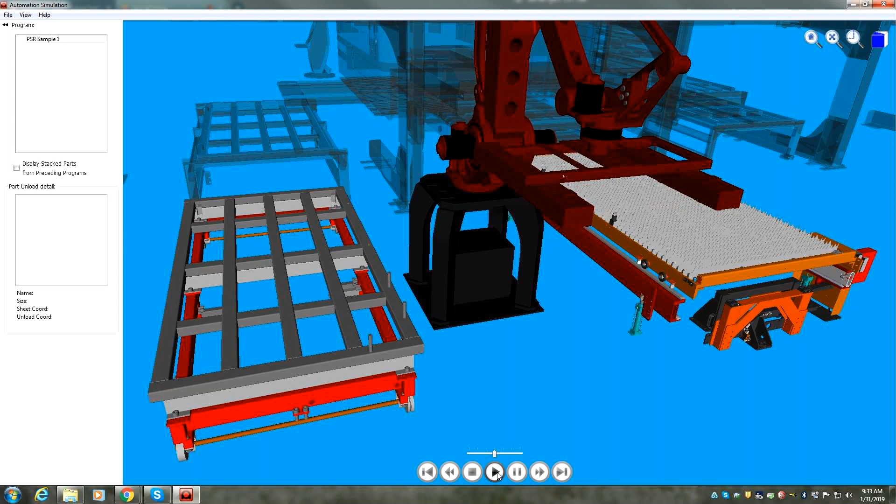So this is showing the process of the unloading. Notice the arms rotate as it's picking up, and watch, it'll go to 40 - it'll go to 45 degrees there on that particular part.

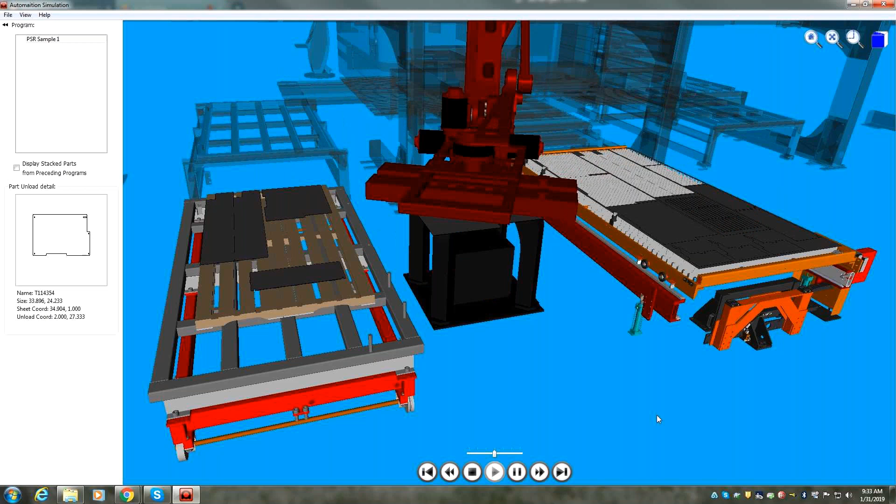Does this simulation give you an estimated unload time? Not at this time, no. Hey Doug, we didn't do an estimated time on the simulation, right? No, that's something we might possibly do in the future.

In some of the drawings I've looked at, there are options to have multiple pallets surrounding the PSR. This is a single pallet - I'll show you the multiple pallets here in a second. Okay, cool, it's pretty sweet simulation.

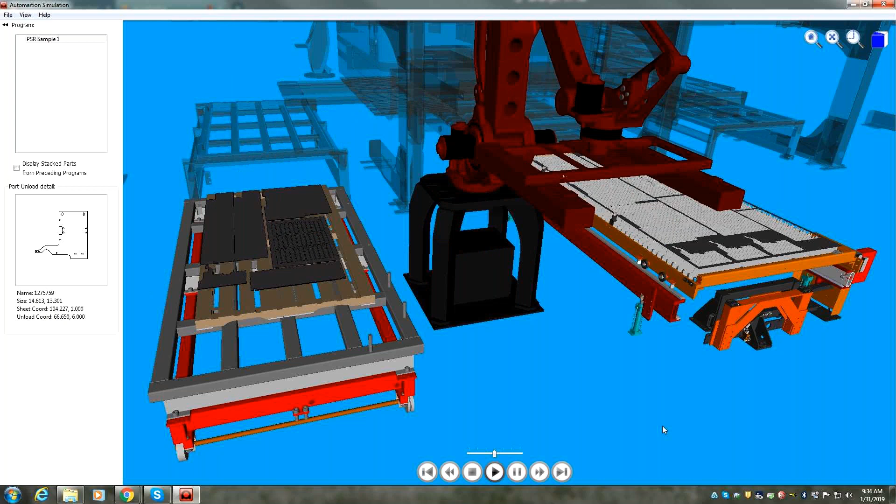So this was just a nice little display tool we put in to show you the movement of the arm and everything. Okay, so that's again just a viewing tool.

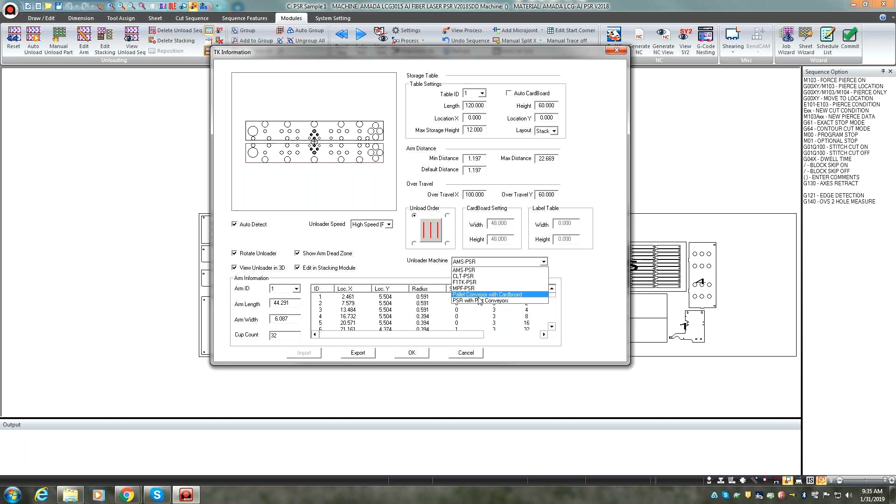To answer your question about the multiple pallets, what you would do is come over here to your TK settings, your PSR settings, and this is just a standard. The unload machine is just a standard AMS PSR. If you had it set up with conveyors and cardboard and PSR with part conveyor, these are the different setups, and I'm going to be honest, I'm not that familiar with them, but I can show you what they'll look like. So let's say we wanted to use a conveyor with the cardboard. We select it, say OK, and then it puts different settings here.

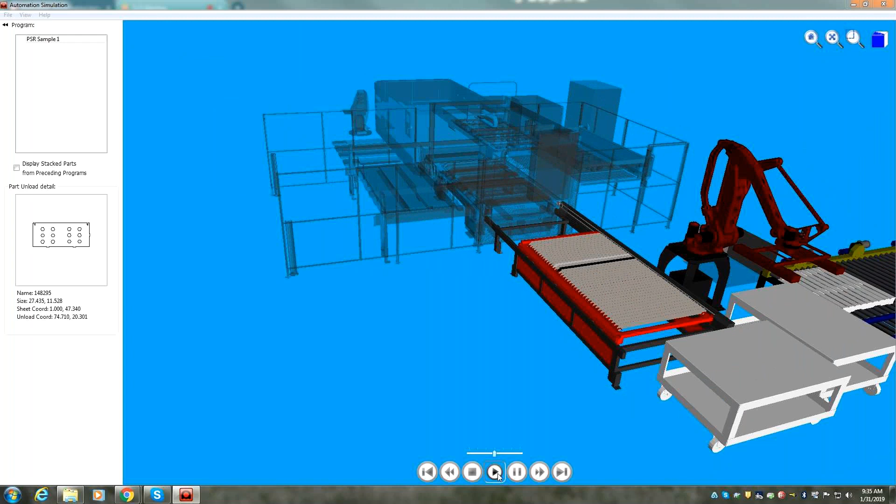Okay, so it depends on how you're going to have it set up. But I think we have all the different setups that we've ever done available. And again, if you did the cardboard, it would have a pallet. It would show you a pallet of cardboard, and it'd be putting the cardboard in between the parts and stuff.

So anyways, you could basically dictate what pallet a certain part went to? Oh yeah, that's when you go into your, let me see. I've never really played with this part, but I would assume if you go into your edit stacking, it should show you all the pallets of where you want to put them.

I'm gonna let. Oh well, you can't. Can you control my system?

Yeah, let me request. This is Doug, my boss. He's manager of R&D. He's going to show you how this.

Do you have control? Let me see. What do I need to do? Did you get a prompt? I didn't get a prompt. You should get a prompt under GoToAssist. Give me mouse control. Where's, let's see, maybe I need to minimize that. Oh, there we go. I don't have a prompt. Huh. I hid the little prompt that was at the bottom.

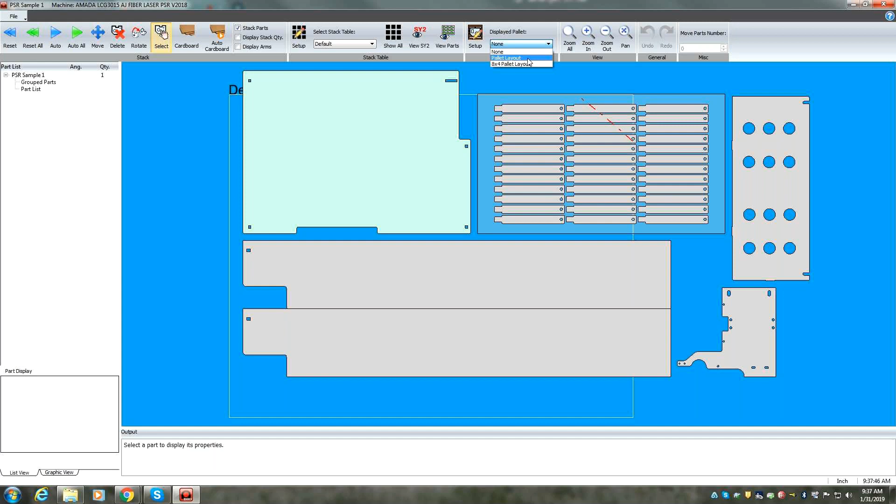Yeah, but okay, so you have to set up the layout. Okay, so these are the layouts that I set up. Okay, so this is where you would set. Basically what I was showing you, this is where you would set up all your pallet layouts for the different stacks, and then also this is where you would set up for the different tables of stacks.

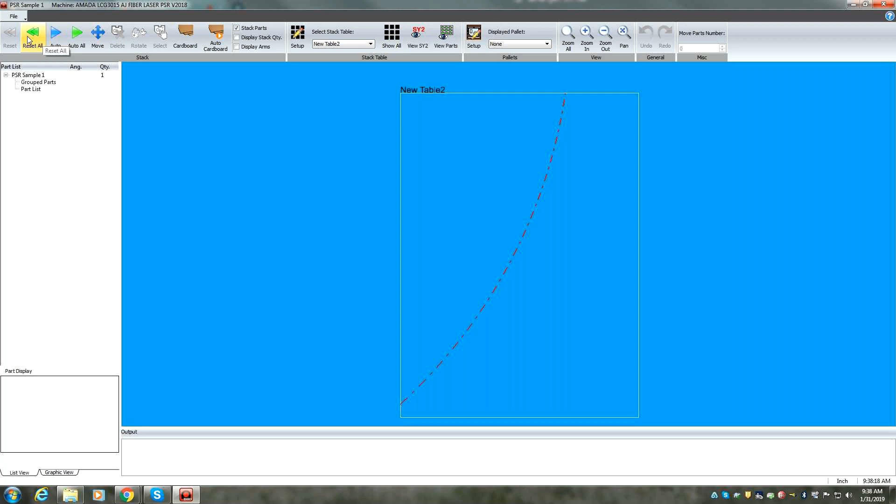So you got table 1, table 2, table 3, whatever, however many tables you have for your stacks, and then whatever table you have showing, you could say, let's reset. Okay, so I could stack, say, this part to this table, and then I could come over here and show this table, and I could stack this part over to this table, and so on. And then of course you could put the pallets on each one as well, but let's not save this.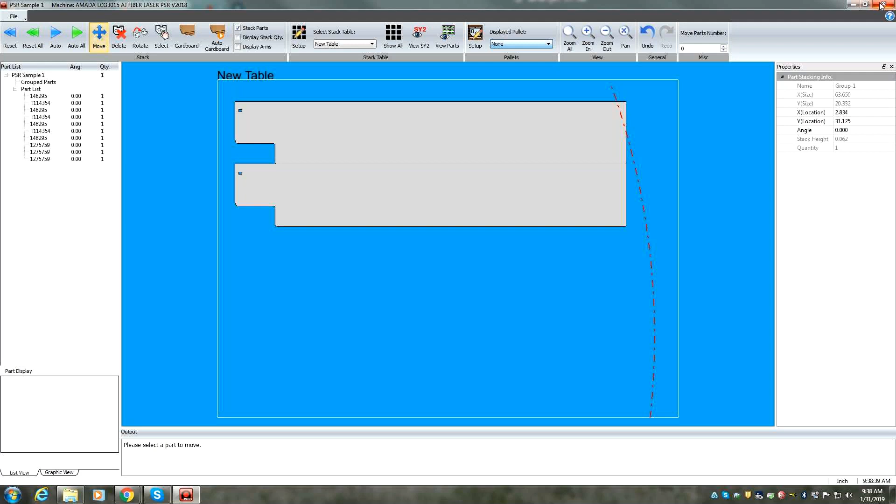So that's basically what I have to show you. Did you have any questions or anything else you wanted to see?

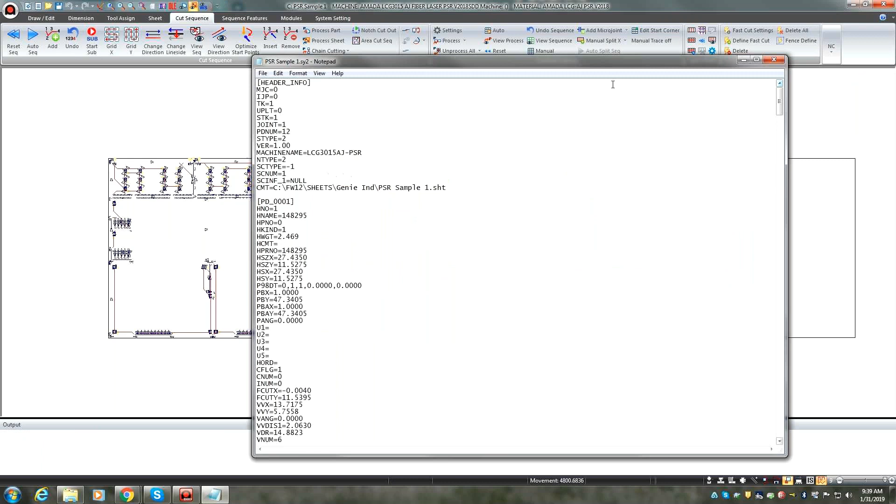I can show you the code. Basically, so when you generate a program, obviously you're familiar with the NC code. So I'm just going to generate an NC view. So this is my actual laser program. Okay, standard laser program. Then what we have, what we call the SY2 file, this is the file that will control the PSR. This is the file that's got all your part data information, your pickup information, the angle, the unload position is the A values here. And so for every one of these parts, you have a PD number. So this is all the data and information for each pickup in this program.

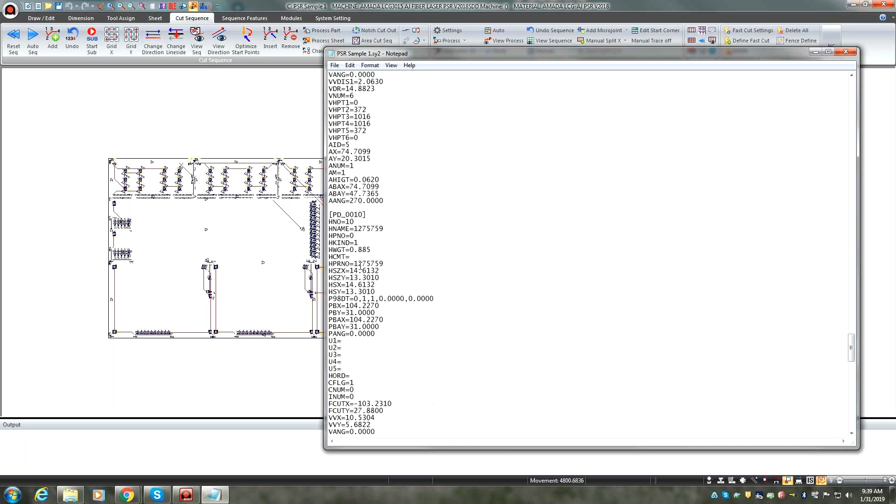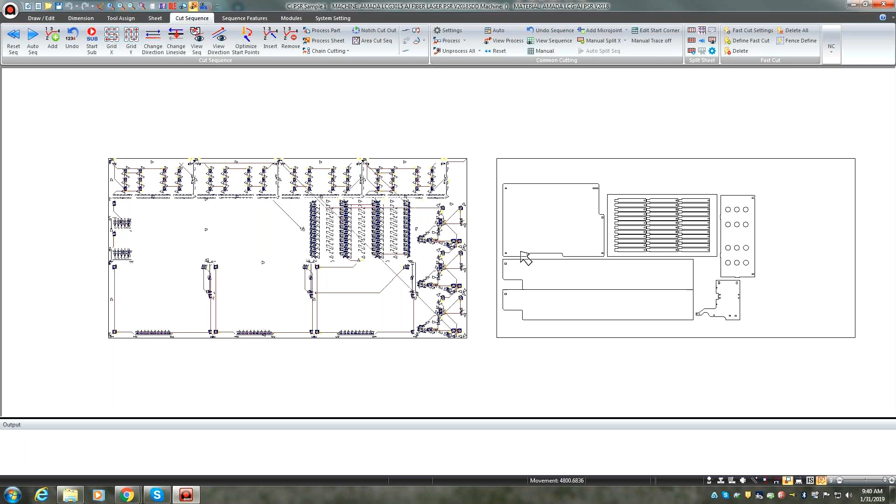I think our biggest concern, you pretty much answered it, is we do a lot. No two of our nests are ever really the same. So we wanted to be able to set part conditions, whether that be notch destruction or where the arms pick them up, and make sure we don't have to do that every single time.

Gotcha. So let's say that this particular part you're going to use on different nests. So I have this set up right now. And what you can do, and I didn't do it on yours, on this particular one.

I'm going to come over here and reset everything. What you can do is say this is how I want to process this part - go to cut sequence and hit auto sequence. So I'm going to save this part with my notching, my sequence, everything, and then save the part. Let's call it, so I can find it easily, 11 PSR demo.

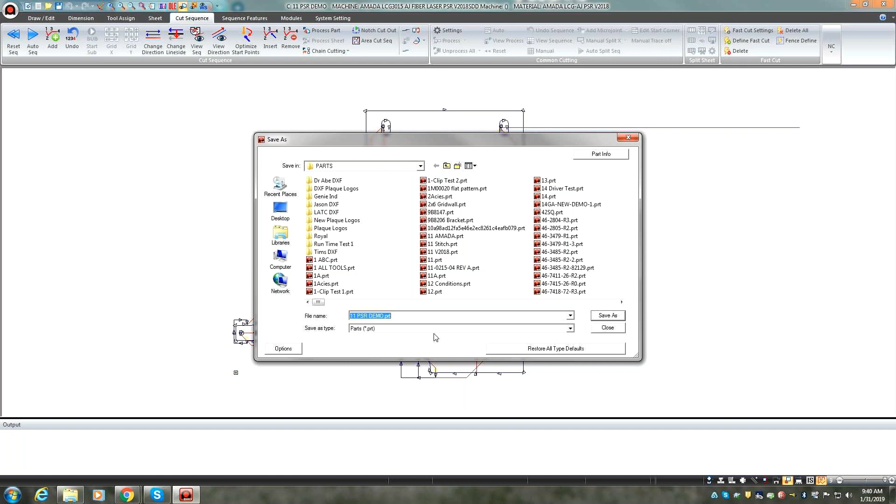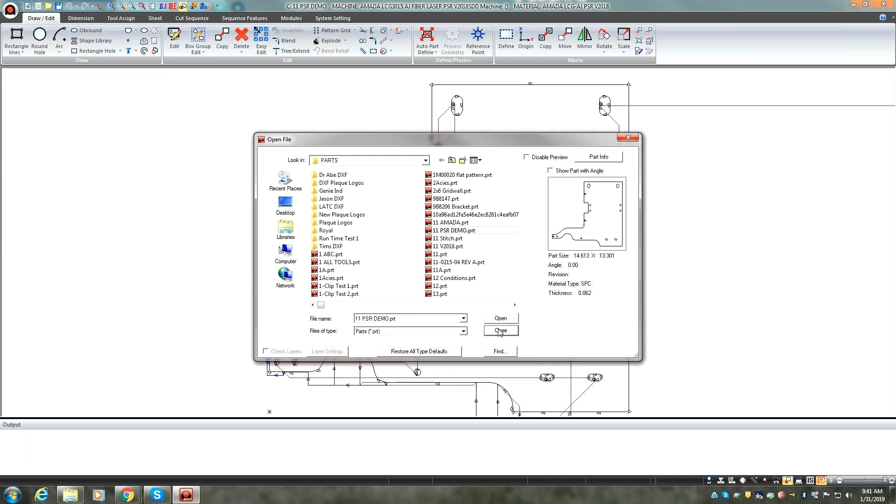Now let's load something else here. That's cleared out of my database, out of my part view. So now if I reload that part, 11 PSR demo, it's got everything I saved with it - the notch release and everything. So now you can nest that part.

To be honest, that's how we recommend you nest parts - have them already sequenced, so you get the cutting and whatever else set up. You may have big holes you want to slug destroy as well. You have all that set up before it even gets into nesting. Then we'd want to go through all our parts, all 500 of them, set them up the way we think best, and then save all that.

I would do it as you go - I wouldn't spend days doing all five hundred. Whenever you need them, do them as you go. As you save them, they're all set and ready to go. Eventually you'd get through 500. It sounds like you guys maybe have your own line of parts that you do - as you do them, save them.

The only other thing - does the PSR regulate stack height by itself, so it doesn't run into other stacks of material? Does that make sense? Yes, there is a stack height option here.

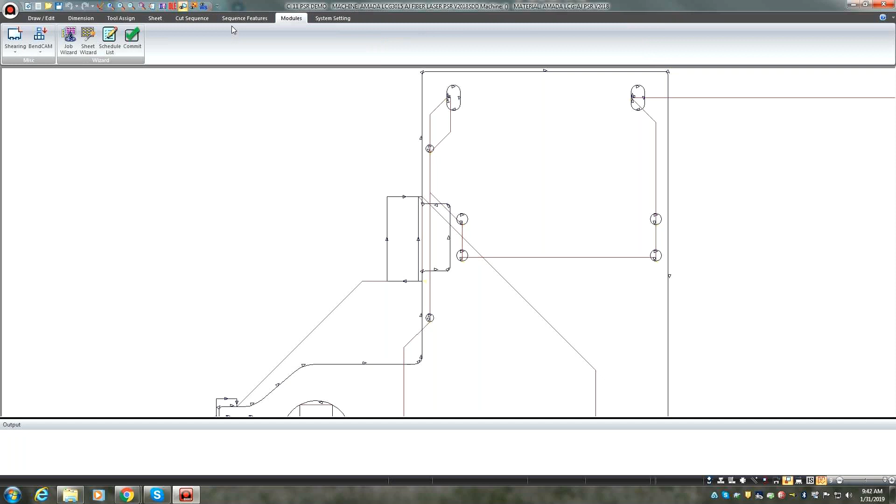Let me get into the sheet to access those modules. Say those ones, we have 36 of those - that's a fairly tall stack. When we have 3 of the other things, will it stack them in order so it doesn't interfere with a previous stack?

That's a question I'm not going to answer because I don't know for sure. I know if you control the stack and control the order of the stack, then the answer is yes. When doing it automatically, you put in a stack height, and once it hits that maximum storage height, it knows the material thickness and the pallet height, because when you create a pallet it asks for a height. Once it hits that height, it will no longer stack to that position. So I know what you're asking, but I don't know the answer for sure - that would be something Thomas would be better to answer.

More of a technical question. He does all the installs and actually sets the machine up itself - I'm just a programmer, guys. I wrote the driver for this particular one, so all the code it outputs is what I did.

Does it know when you've swapped out a pallet? If the pallet showing on your screen - say there's a new program and we dedicate another space on the pallet for a different part, so we swap out the pallet - does it know we've swapped it out, or is there a manual input? You would have to tell it. It's only going to know what you've done. Everything saved and stored here in the edit stacking is what tells the software what you have and don't have. So if you've taken a pallet out and put another in, you need to come over here and do the same thing. Obviously the software isn't tied into your machine to know you've unloaded a pallet.

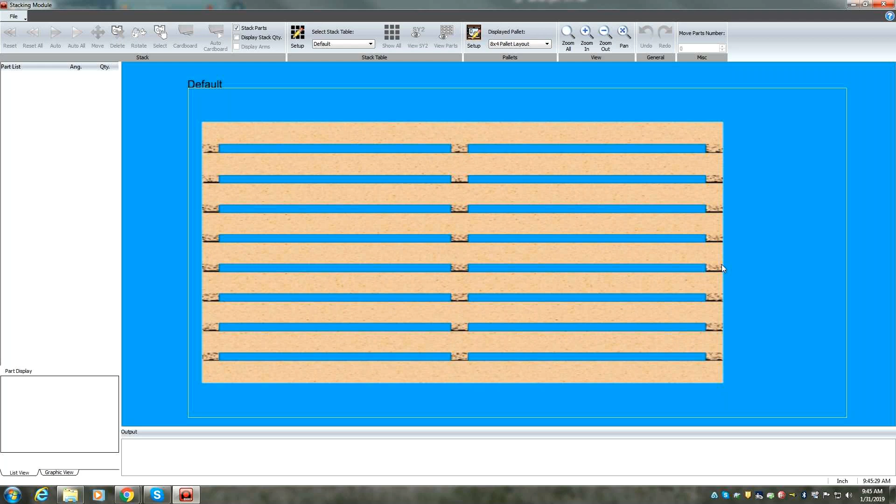Correct, and once you do a pallet layout, you can save it as well. So if you come in here to open, you can open a pallet layout and say okay, now I'm ready to run this one too. Because I'd imagine most people have a few pallet layouts they run more often. Right, redoing the same thing every time.

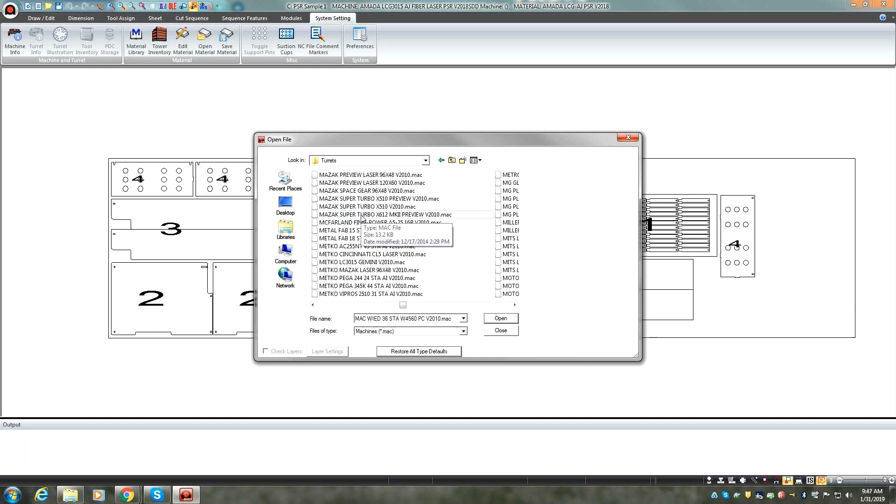I guess the only question - you might not know this - but when you're doing all the slug destruction, how much time does it add? I'm just kind of afraid it's going to add a lot of time. It does add time - it's cutting time, you're adding cutting time is what you're doing.

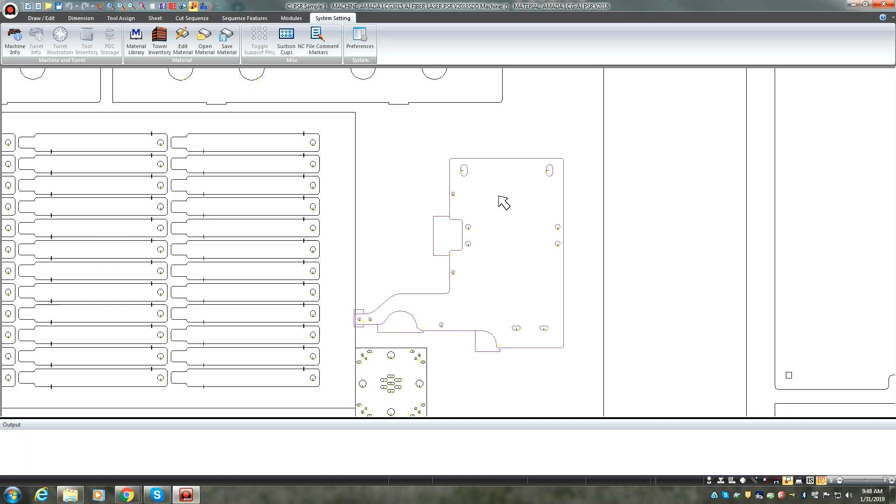So that's why on this particular part, you might be safe to cut all that away and just let it be gone. But you're adding that much more cutting time to your program, and I had 3 of those parts, so take whatever time it takes times 3 - that's how much time you're adding.

So you want to do as minimal as possible, but you don't want the PSR to hang up, so you want to do as much as possible. You definitely want to make sure the corners are free. Radius corners help tremendously, and most of your stuff is radius, which is great - that'll help a lot. But anytime you have concave cutouts, or cutouts that go into the part, there's risk of hang up because you have material in there, your skeleton's inside of there. So basically all we're trying to do is get rid of that skeleton.

Square parts should have no problem at all with the gauge material you're using - you don't have to do any kind of destroy. Our thinnest material is 12 gauge - is that right on the edge? Oh yeah, you're fine, for the most part. 12 gauge is .090, .105? Yeah, oh yeah, definitely - that's your thinnest? Yeah, then you guys are good.

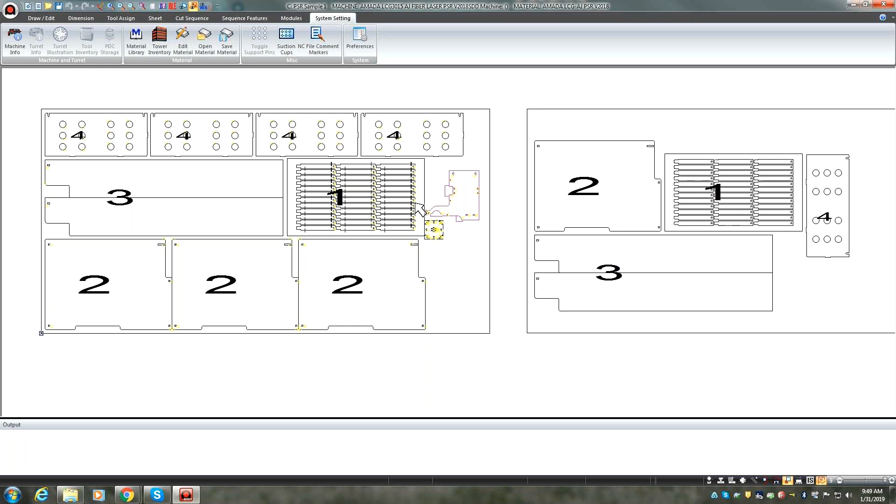Experiment, and talk to Thomas or the guys that are more technical. But 12 gauge, that's pretty thick - .105. You're not going to have to do as much of this as if you're running 20 gauge or 22 gauge, because that's thinner material, easier for it to wrap up underneath the skeleton. With thicker material it's going to stay in the frame regardless of vibration, so when it gets over to the pickup area, the thicker material keeps it in place and it won't have any problem. You may not even have to do this on these parts with 12 gauge.